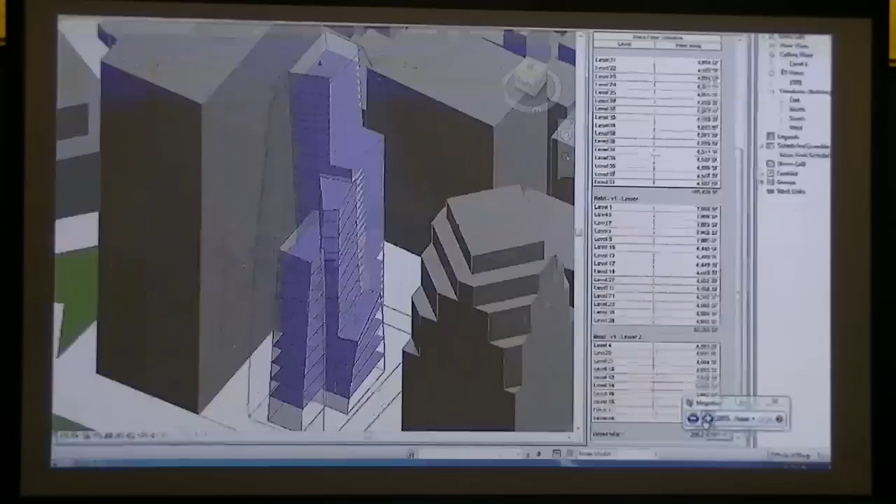Okay, so I'm looking around and I see everyone has some kind of mass, and you have your mass floors. I've also kind of modeled this up real quick, and I'm zooming in on my total area. I've got about 286,000 square feet, and I said, you know, roughly around 287. So you can kind of see that 287,000 square feet could possibly fill up quite a bit of the site, depending on how you organize your floors.

And I've actually got this modeled in 3 different masses with a couple different voids cut, and then I've also used the join command to Boolean union and Boolean difference some of the intersections of the different masses. So I can show you exactly how we can go about doing that. I'm going to hide this site, and I'm actually going to do a permanent hide for now. So I'm going to right click on it, and I'm going to use the pop-up menu here and say hide in view and then element.

Some of you were asking, if you happen to hide something permanently, how do you get it back? You can't use the sunglasses because the sunglasses are only for temporary hides. If you want to get something that you permanently hid, to get that back, there's a little light bulb next to the sunglasses. If you look right there.

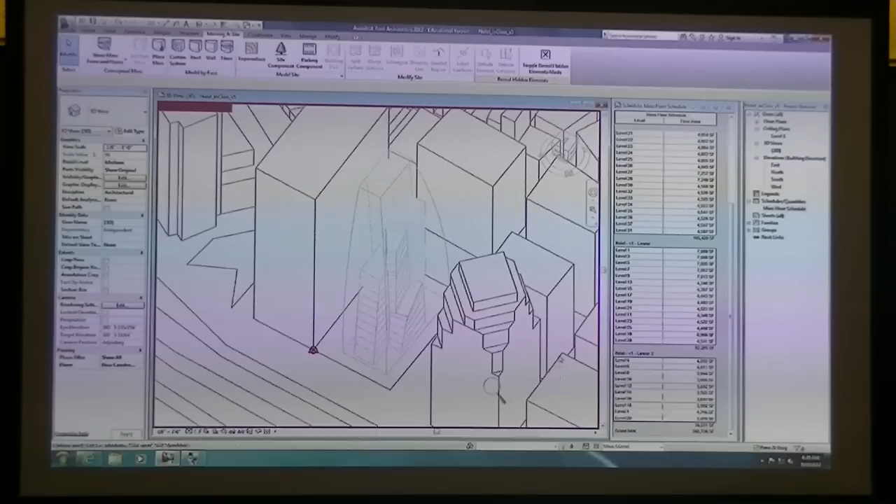And when you click on that, it'll reveal everything that was hidden in red. And so you get this kind of red or pink box that goes around your view. And then everything that was a hidden element is something that you can select, and it's red. And then there's a button up at the very top that allows you to unhide, or you can also right click on it and also choose unhide in view elements. And then once you exit out of that light bulb, you have your element back.

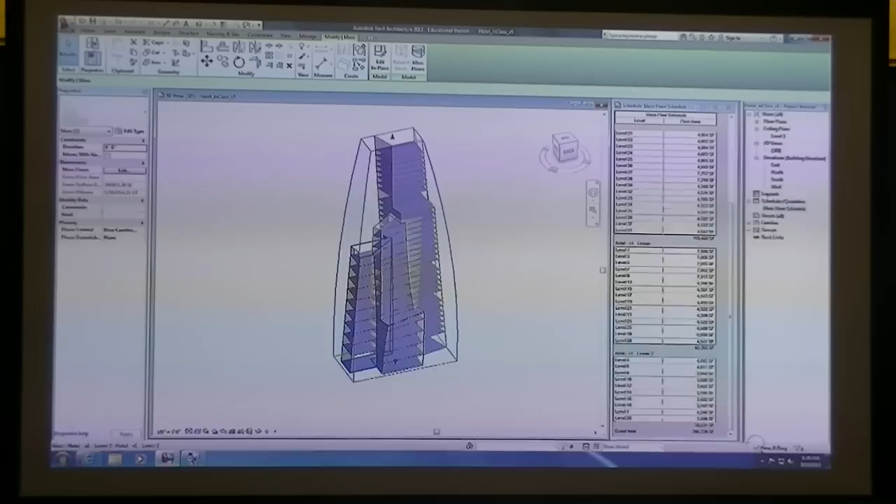So what I've got here, I have my zoning mass. I have this other mass that I built and cut a void out of it so that I could get within my zoning mass. I also created a parametric mass that had to do with making a reference point and then some reference lines that twist around the reference point. And then I just made a quick simple mass that happened to be here.

And each one of these has a different set of which one has what level each floor happens at. So I kind of alternated in some of these cases back and forth. So basically this middle one is every other floor. This one has floors pretty much on every level except for a couple spots. And then this other mass I did kind of the opposite, every other floor. That was part of my twisting box. I'm also going to hide my zoning mass so we can look at this a little bit more as well.

Any questions so far about massing? I know you guys are kind of just first doing it for this first assignment, and the purpose of this assignment was really just to get you familiar with the intuitive massing tools. Anyone having any kind of issues or trying to figure out how to manipulate something, from one floor to the other or one mass to the other? Any major problems right now? Okay.

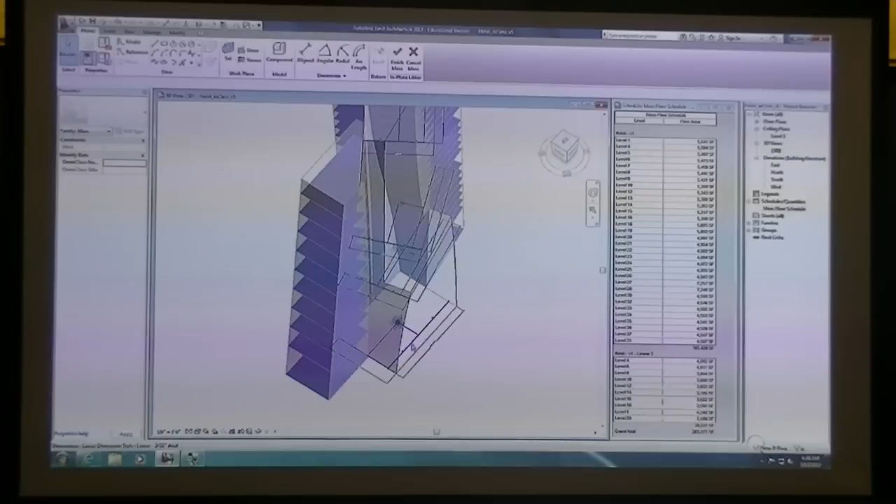So, if you have multiple masses, and in this case I have 1, 2, and 3, this middle one is one I made parametric, and I've got some instance parameters that are off to the left that I set. But if I click on Edit In-Place, I created this mass similar to one of the exercises way back when, and you may not remember, but you can actually create within the in-place masses, when you're in the project environment, you can apply your points just like we were doing with the bridges.

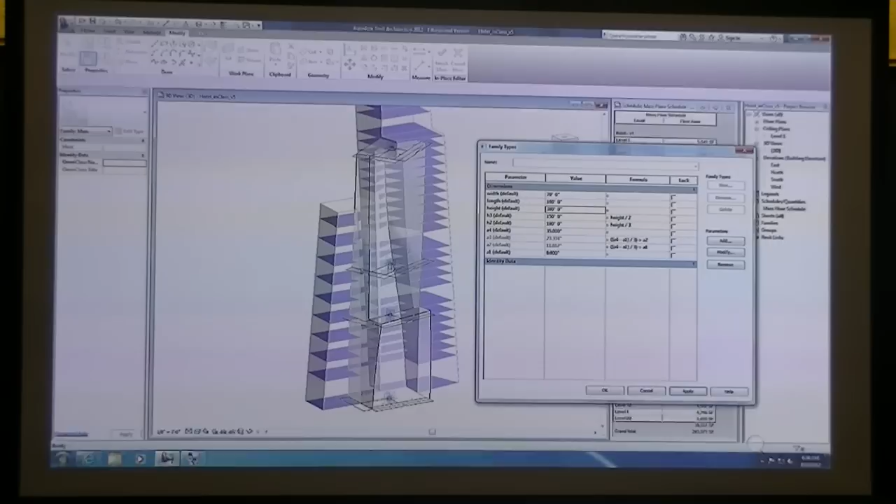So I have a reference point that's in the center of each of these reference rectangles. I set up a bunch of parameters that just have to do with the angle of rotation of that point and also the height of where those points are located. So with this mass, I created a height of 285 feet. If I change this to 300 feet, my mass grows and all of the other points grow with it. I created certain locations of where these other points would always be in relationship to one another. And then same thing with the angle of rotation.

I can actually change the bottom and the top rotation and kind of twist my box a little bit more as we go. And every time you make a change and hit Finish Mass, your floors and everything will update for whatever shape that actually conforms to.

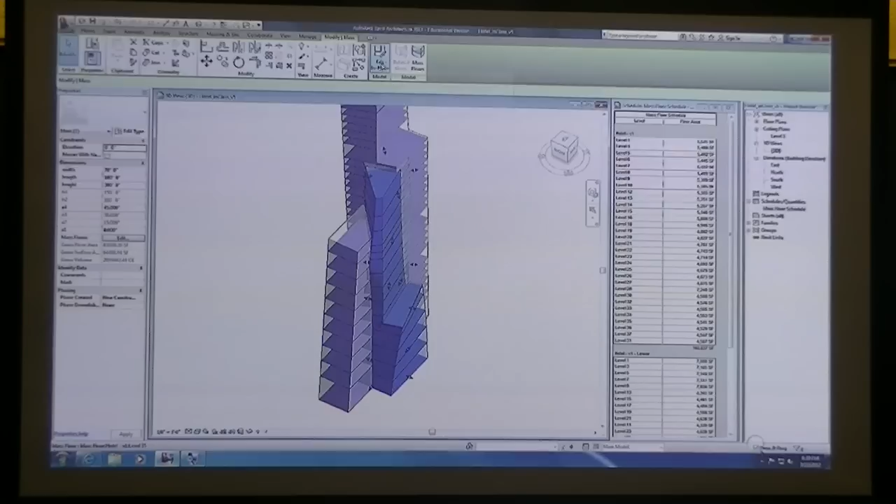The other thing is if you're using voids and if you want to actually go back in and manipulate your void a little bit more, you have to be in the mass in which you created the void. So in this first mass, if I go into Edit In-Place, I can then tab over and you can eventually select the void.

But to further manipulate it, if you turn on the X-ray view, that's when you can start to select either the faces to move, or the points, or however you want to create that void. And then once you left click into space, it kind of goes away again and cuts that void. For the parametric mass, how did you create the planes?

Did you have, like, you place the points and then how? Yeah, so I'm actually going to quickly go over that exercise. Let me show you one more thing, and then let me just show you some of the parametric twisting tower, kind of do a refresh on that exercise. Because I believe I kind of quickly showed it to you in class number 5, and that was quite some time ago.

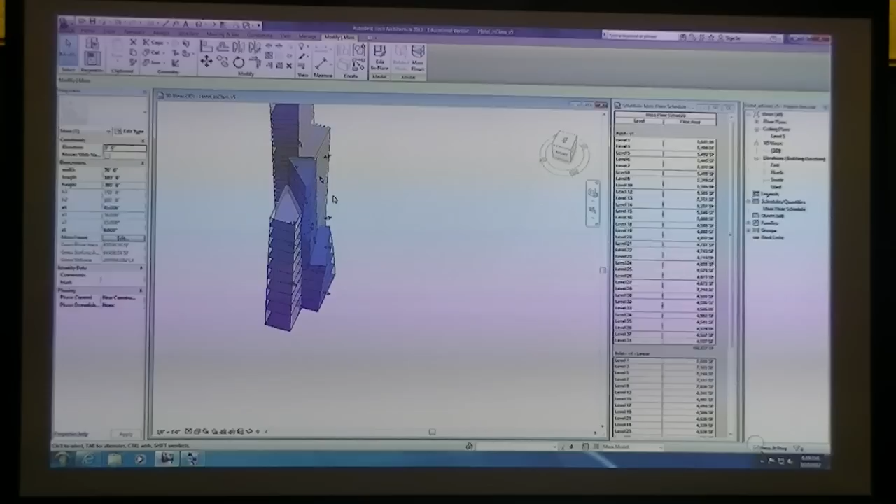One thing is I've got these masses joined together. Right now, my total square footage, of course, I just twisted my tower a little bit, so I'm at a little bit less now, 282,000 square feet. But I originally had also joined my floors. So if you have a couple intersecting masses, if you were to cut a floor at each level, you're actually kind of double counting on some of the floor area, because if I didn't join this mass with the other, here is a floor level, and if you hover over, it tells you what level you're on. So on level 25, that little pop-up window told me it was level 25.

When I look at that kind of pie wedge, it goes and overlaps this other tower. And so really, when I look at my square footage now, all I did was unjoin my towers, and I'm now up to 351,000 square feet. So if you have overlapping masses and then you did your different levels, you could be double counting on some of your area, and maybe making it so that your tower is a lot smaller than it really should be.

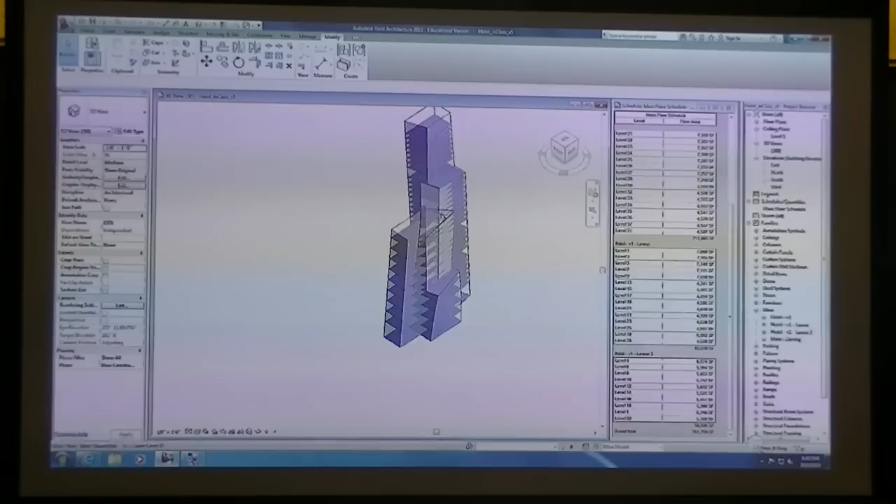So when you have intersecting masses, over here there's the cut tool and also the join tool. I can join these two together by just clicking on join, and the first one that you select is the one that's going to remain, and the one that you select next is the one that's going to have particular intersections cut out of it. So watch what happens, let's see if I can zoom in and look at this intersection area. I'm going to first choose the larger mass and then the second one. You'll see that the larger mass remained and the smaller twisting mass got cut by that operation.

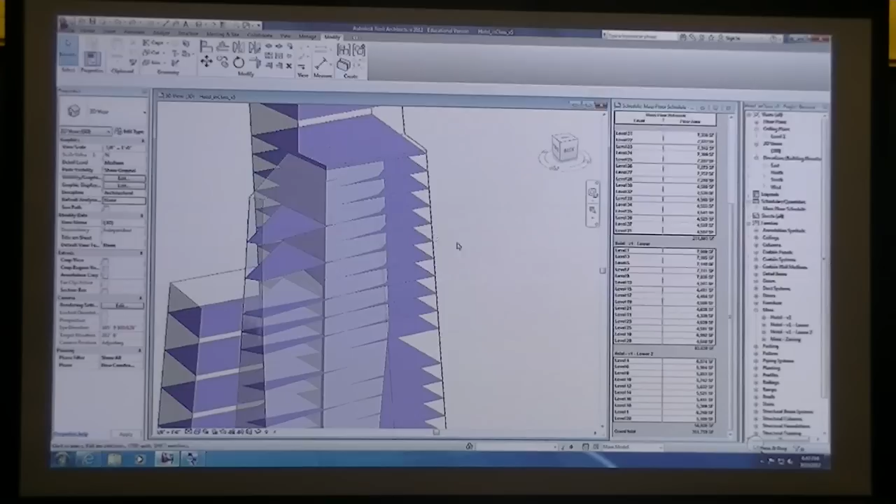And of course, if I reverse it, I did a Control Z. If I join the first one with the second one, you can see now I've got floor wedges that have a void through it, based on where this other mass cut through it. So it's kind of like in Rhino or even AutoCAD, when you model, it's your Boolean unions and Boolean difference. The only thing is, by using the join, none of your pieces disappear.

If I were to do the same operation with a cut, the first one that I pick is the one that's going to remain, and that second one, let's see, I think I did the same thing. So that remained as well. If you delete it, everything goes away. So I guess I'm not sure what the difference between cut and join is. It looks like it does the same thing.

If you join the floors, like let's say you have floors that are close to touching but not, or you have like a mezzanine, is it gonna try to connect those since you're not selecting the actual floors? It's just going to be doing the massing. So if your massing's touching, one's going to cut the other. If they're not touching, nothing's really going to happen. Okay. So the floors are just a result of wherever your levels happen to be, and the resulting geometry of the mass.

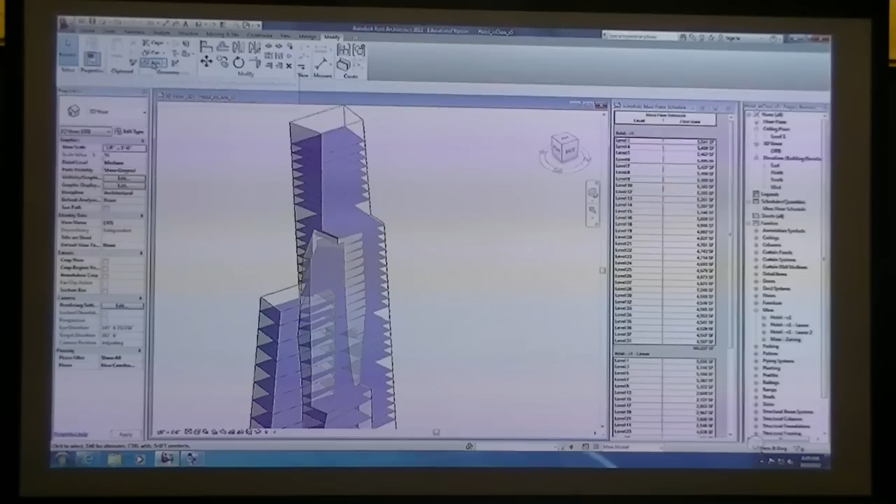So I guess really in this case, using massing, cut and join do about the same thing. I was thinking if you use cut, the second item should go away. But it kind of makes sense, I guess, if I delete one of these, the cut actually goes away as well, because it doesn't have anything to reference.

So you could actually build up a couple different masses together, and then what I did is in my mass floor schedule, if you look to the right, it's actually a little more complex now because I organized it based on hotel volume. And I'm going to show you a couple tricks of how to work with schedules, because once you know this, then you can schedule anything and basically sort and filter and do whatever you want.

With this schedule, and maybe I should zoom in on it a little bit. You can see I've got, doesn't really help. I have hotel version 1. That was the name of my mass that's over here to the right. I have hotel version 1 lower. That's the same thing as this volume to the right. And then the lower number 2 as well.

And each one is totaling up all of its square footage. So I've got a subtotal, and then at the very end I have a grand total to kind of track all of these different volumes. If you have a mass floor schedule, if you open it and you look at your fields, I basically added a new field from the left side, which is your available fields that you have. And it was called mass family.

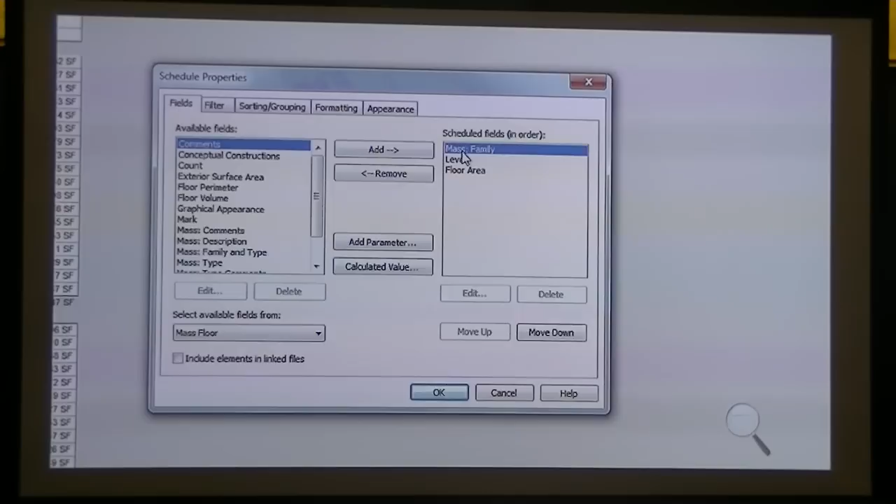Because we created an in-place mass, we're creating a family. And the mass family is the name of whatever you actually named your mass. So that's where I'm getting the hotel version 1, version 2, and lower and all that kind of stuff. Under formatting, this mass family, I made a hidden field. I'm going to unhide that for a minute and look, and you can see that each one of these items now has hotel version 1. It basically has the name of the mass all consecutively in the left-hand column of where that field occurred.

Basically what I was just doing is trying to organize and sort these together. If I go under sorting and I sorted this by mass family, I'm basically organizing all the hotel version 1s to be together, and then the hotel version 1 lowers to be together, and so on and so forth. You're basically grouping anything that has the same name together. So if I actually group this by level, this would change around, and I'd actually have level 1s, level 3, and kind of a mess actually. Go back to...

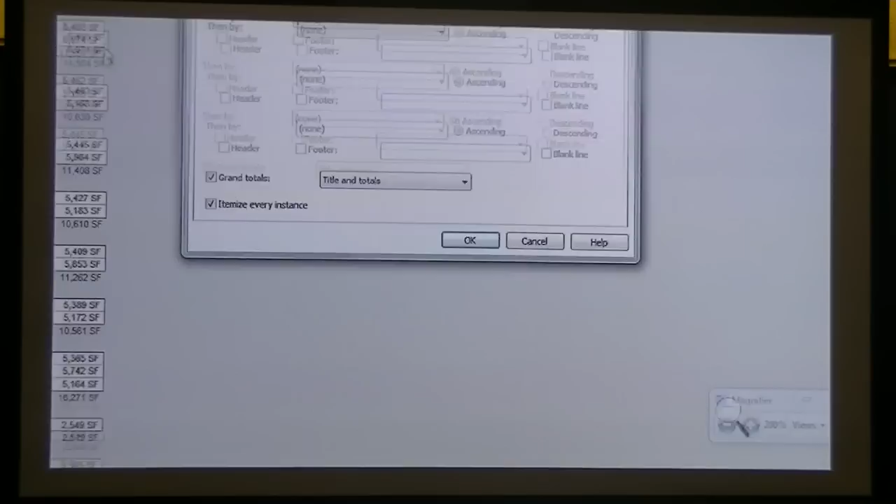And then you have some other options up here in your scheduling so that after you sort something, you can make it a header that basically gives it its name, puts it above the list, and then the footer, and then you have some options for what can be in the footer, and basically it usually has to do with calculations, so totals and counts. So that's how I'm getting the subtotal underneath here. And then at the very end I have itemize every instance, which means show every time I have a mass floor that's in that mass. And then I have a grand total so that I'll get a total at the very end.

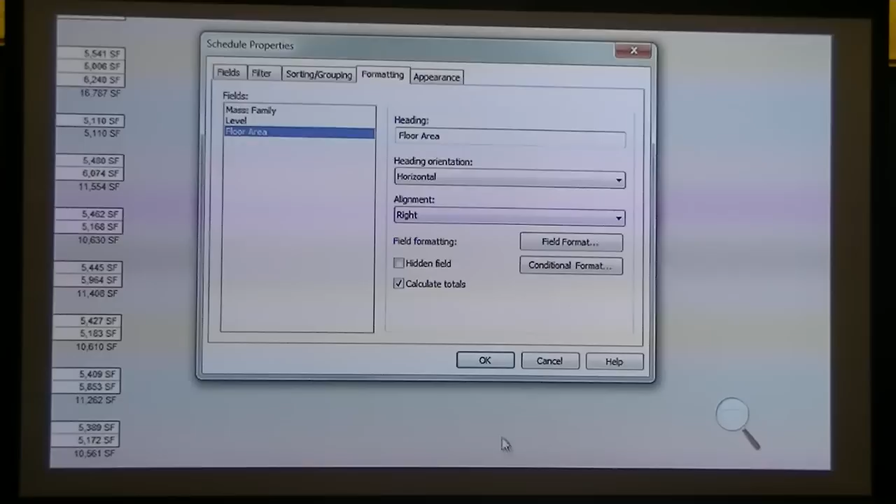The other part to that is if you're totaling items, you have to go to formatting and then click on the field and make sure that you're calculating totals so that it will actually put something in the footer, and then it also has it in the grand total. So I'm going to bring that back.

And so basically by sorting by that mass family, and after going back in and hiding it under formatting, if I hide the mass family, I don't need to see that header basically repeat all the way through my schedule. I just want it as a title for each of these boxes. So that's when you would hide a field, so that you can use it as a header in a sorting mechanism.

You can also filter. So let's say I decide I don't want this particular schedule to schedule anything that has to do with Hotel V1. So I can filter by mass family, and I can say make sure it does not equal, and then it gives me options to pick.

Which item in that field I don't want it to equal. So if I click on that, hit OK, and zoom back out, I no longer see that hotel mass number 1 located, and then of course my grand total is only totaling up these two.

It's not that big a deal maybe when we're just kind of looking at mass areas, but as we get into doing a door schedule, there's a lot of filtering that you need to do and hiding, as well as any kind of other quantities that you want to look at, especially if you're doing like a cost estimate. You might have a couple fields that you want to filter out and just say, I just want this particular schedule to give me the cost of division 9 in the specifications, and then you could have that only show up in there instead of showing all the divisions.

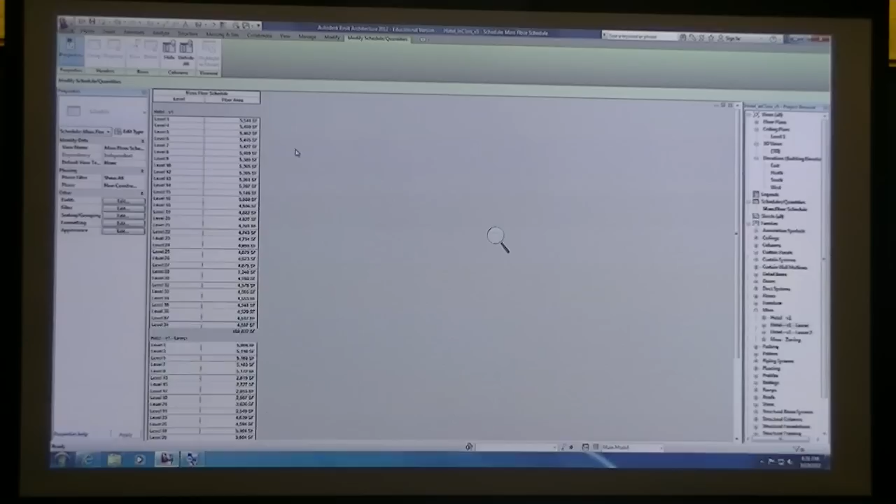So that's kind of a quick lesson in scheduling. So it gives you the ability to give yourself some organizational tips. Exit out of that. And now I'm going to show how to quickly make a twisting tower with some parameters.

Let me get rid of this guy. So I still got my site hidden. I'm not going to worry about where I'm placing all of this. I'm just going to build it off to the right in this white space. But I can create another massing, and I'm going to do an in-place mass, and this time I'll just call it a twisting tower.

And once we do that, we go into a sketch mode where we're actually now in the conceptual design environment. All of our toolbars have changed. And I can place a point. So again, you start to see we get our point element that we're very familiar with now. We get that as an option to come back. And that's always a reference point. And I'm going to place this point, the very first one, on level 1. And I'll just place it off to the side somewhere.

And again, like we always do, we turn on our show always, our reference for that point. And then within this mass, I'm going to create a couple of parameters real quick. I'm just going to call it L for length. And I'll make it an instance. And I can do a W for width and make that an instance.

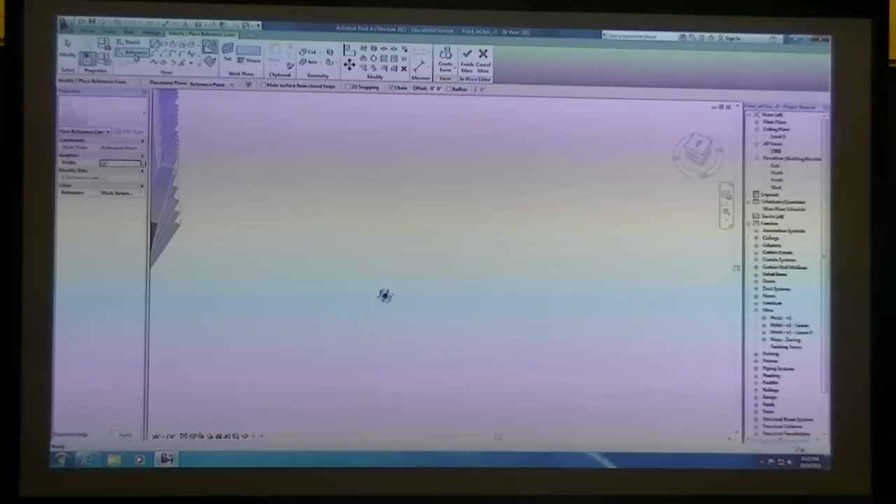And then all I'm going to do is draw a couple reference lines, but what I want to have happen is I want the reference lines to be equal on either side of this plane, so that basically this point is representing the center point of rotation for each of the floor lines, or these profiles. So I'm going to click on line and also make sure I'm drawing a reference. If you accidentally draw a model, remember you can always turn it into a reference.

But when I place this point, I actually want to pick. So, we have a lot more levels now to scroll through, so you might have to scroll down to the bottom and choose the point. And then we want to pick the horizontal plane of that point, because I basically want to make another profile on this plane, and it's going to rotate as this point rotates.

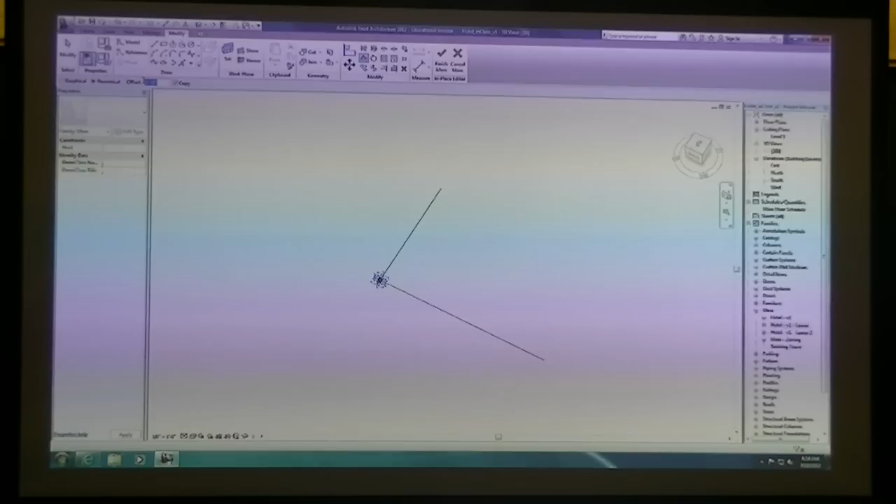Next thing I'm going to do is draw that line again, and I've picked where I'm drawing on that plane. I'm just going to draw one at the center line in each direction. I'm going to make sure that I'm snapping to 90 degrees. And I'm going to offset, and for now I'm just going to do like, let's say 20 feet as an offset. And I'll offset this line on either side.

And then you can use the trim and extend the corners to make a box. And then when you're done, you can just delete those reference lines that were part of the middle, because we don't need those anymore. The next thing I'm going to do is draw an aligned dimension. So it's already up here in my measurement tool palette up above, or you can go into Home and you can also find aligned dimensions.

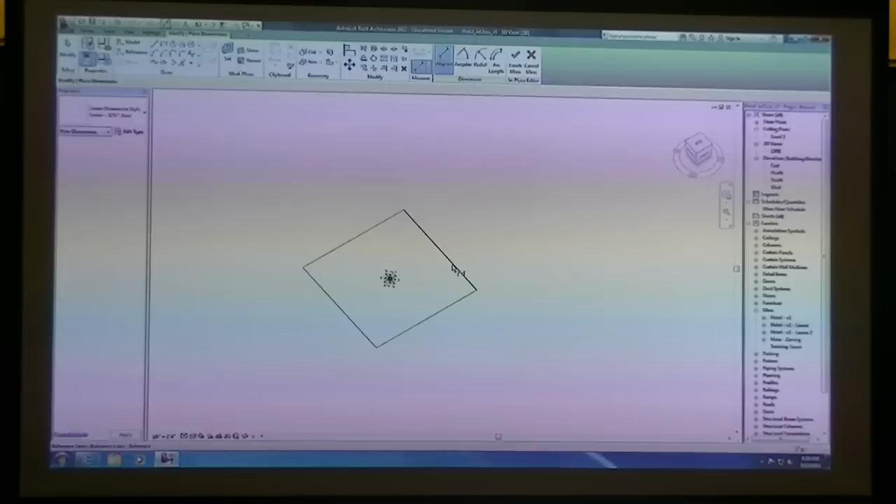And I'm going to first do a dimension that goes to the center plane, not the point, the plane, the vertical plane of each of these, and I'm going to choose equal, equal. I'm going to do the same thing going in the other direction and choose equal, equal. And then I'm just going to do an overall dimension on each side as well. I'll pause for a minute, but I'm going to apply one of these to be the length, another one to be the width.

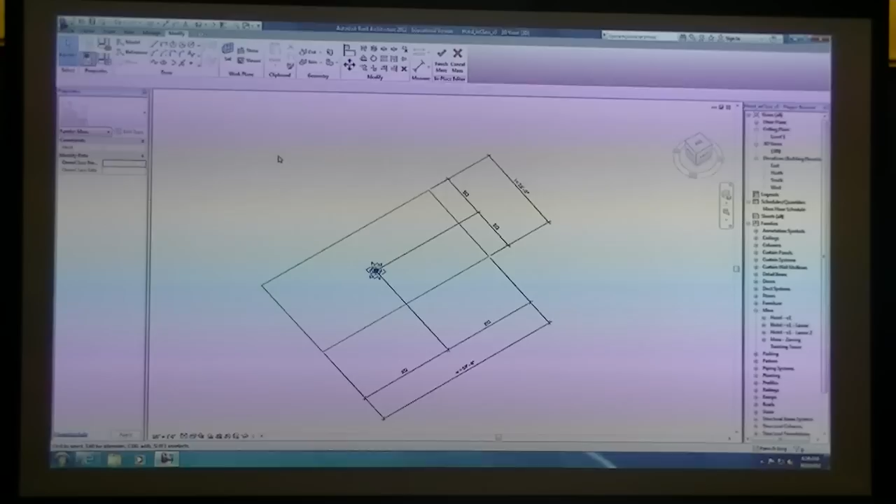And I better test it out to make sure it works. So I'm going to change this to 50. Change this other one to 25. So after you're done and you've set your equal, equal, your equality constraints, and then your overall dimensions, and you set those to either length and width, you want to go back into your parameters and change the values and test it to make sure that it's operating correctly.

Everyone got that? Still working on it? I'll give you a minute.

When you draw a dimension string, I'm going from one line, snapping to the vertical plane of the point, and going to the next one. When you drag it off to the side, you'll have an EQ with a slash through it. Or if you already deselected, you can select that dimension string again and that EQ will come back. And then you can place the EQ.

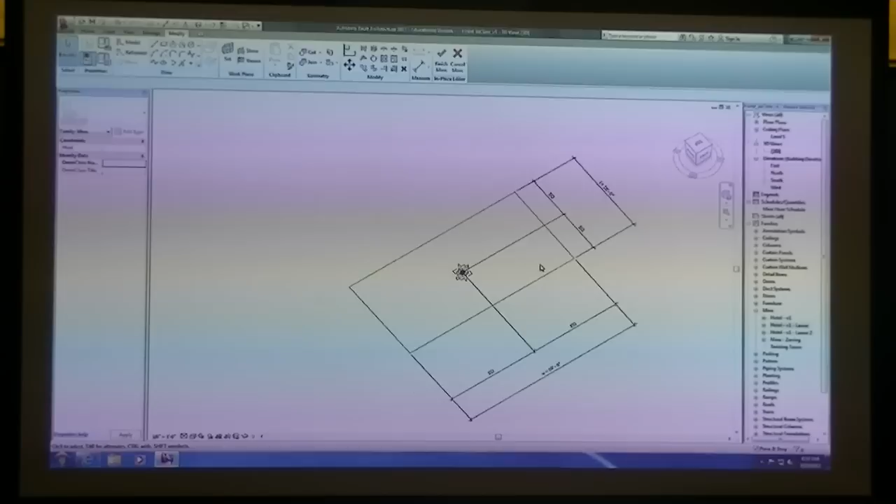And I have an error message that just popped up because I already have an equality setting set, and it's yelling at me saying I'm over constraining. I can't select my parameter because it says line is too short. Line is too short. Yeah. Are your parameters set to 0 before you apply them? Yeah.

Okay, everyone get your equal, equal. When you have your equal, equal, that has to be a continuous string. And when you apply your overall dimensions, those can only be one string at a time when you're applying them as parameters. And you don't have to lock anything. The equal, equal creates a lock for you. Test out your parameters to make sure that they're moving about the center. So I'm going to type in some different dimensions and make sure that everything grows about the center.

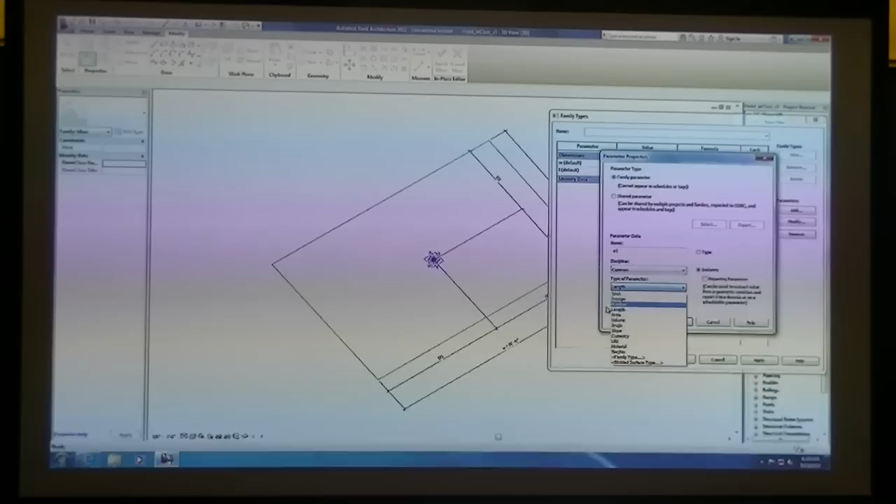I'm going to create another parameter, and I'll call this A1 for angle 1. And I'll also make this an instance, but we want to make sure that type parameter is set to angle. And we can hit OK.

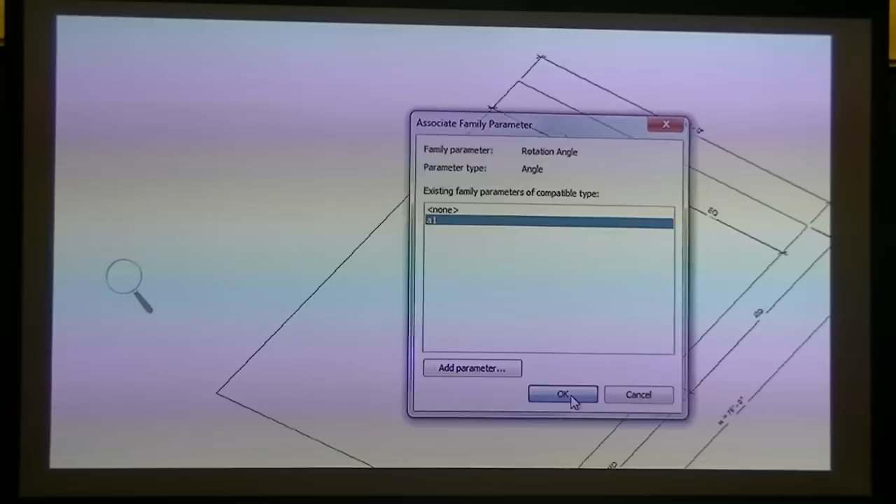So what we can do now is take this point, and because this is a reference point, off to the left you have additional parameters that you can choose. And so we can take this rotation angle and set it to equal A1. Then, before we continue, you want to test that when you change this angle in your parameters, so if I change this to 25, everything should rotate.

Basically, what we just did is very similar to when we did the cross-section of the bridge. Before you did your sweep, we made the width change, and then it changed by the center point. It's basically the same concept, but we're now doing it in a horizontal way. So again, test your angle. It should rotate around, and so should all of your dimensions and everything around it.

Okay, so the next thing I'm going to do is select all of this. And I'm going to copy it to the clipboard. And then when I paste it, choose aligned to selected levels. And then just for now, I'm going to pick level 3, level 5, and level 7. And click OK. I'll Control Z that and do that again.

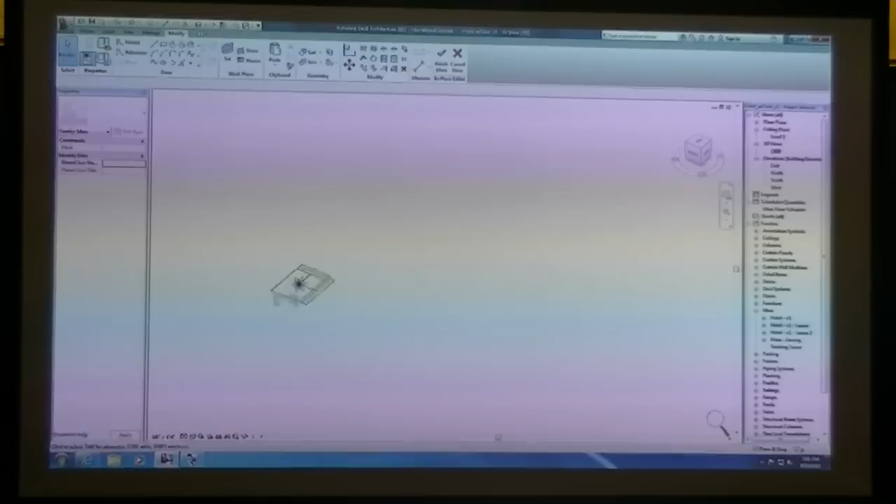Does everyone have this part worked out, the base? So select the whole thing. I windowed around it. I copied it to the clipboard. You can either click on this icon up here, copy to clipboard, or do Control C on your keyboard. And then when you paste, click on the down arrow under paste and select align to selected levels. It'll bring up this dialog box asking which level you would like it to align to. And then I picked level 3, holding Control, level 5, and level 7, and then I hit OK.

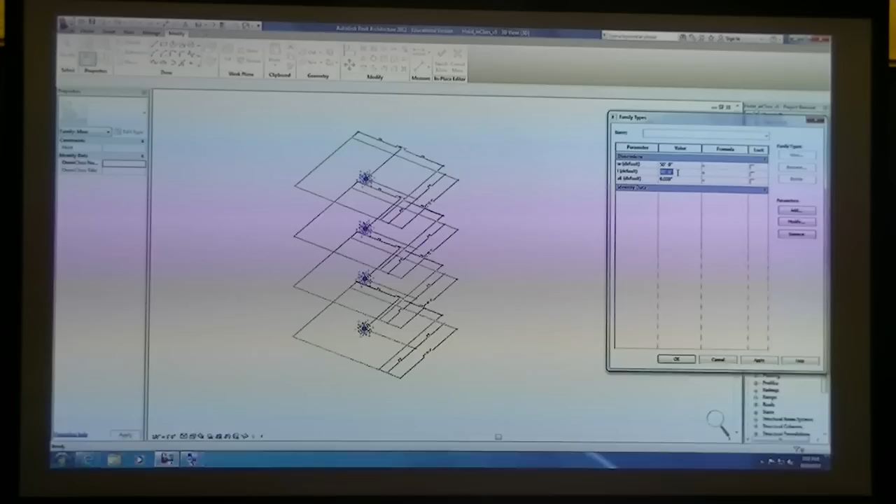This way you don't have to set up all those parameters again. You're basically just copying it up. And if you change your length and width, if I go back and test things out again, all 4 of them now manipulate and change as well.

Now, you're probably wondering why I didn't just do every single floor level. You could go into that complexity, but even though we're aligning these particular floor levels, what I'm doing is establishing a height constraint, an overall height, and then making my other points in between evenly dispersed, from the start point to the top. I'm going to also do the same thing with the angles.

So I actually need to create 3 more angles. I need an A1 through 4. So I'm going to do an A2. I'll make that an angle in an instance. I'm going to do an A3. That's an angle in an instance. And then also an A4. Angle instance.

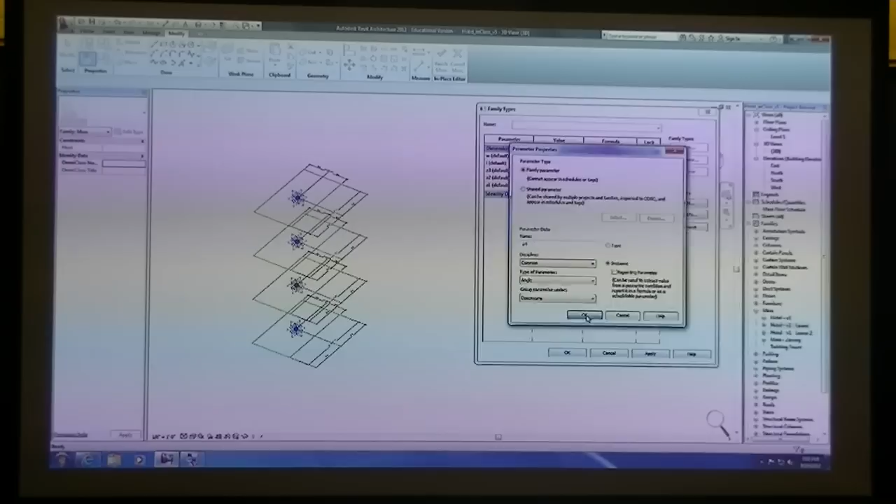I'll also make an overall height, so I'll just call it height. Or I could just call it H, since we're trying to be short. Is that an instance also? Yeah, I'm making everything an instance. And I might make the H a value of like 150 feet, just as a default for right now.

Then I also need basically, H is going to be the top point, and we need also a height for these other 2. So I guess it really doesn't matter what we call them, but maybe call it IH1 for intermediate height. And I'll do IH2.

Now basically what I want to have happen with the angles is I want to be able to control the bottom angle and the top angle, and then these other two angles can just rotate and try to morph in between so that I get a smooth twist. So angle 1 is going to be 0, angle 4, right now I'll set that maybe to 100 just so I have an easy number to work with.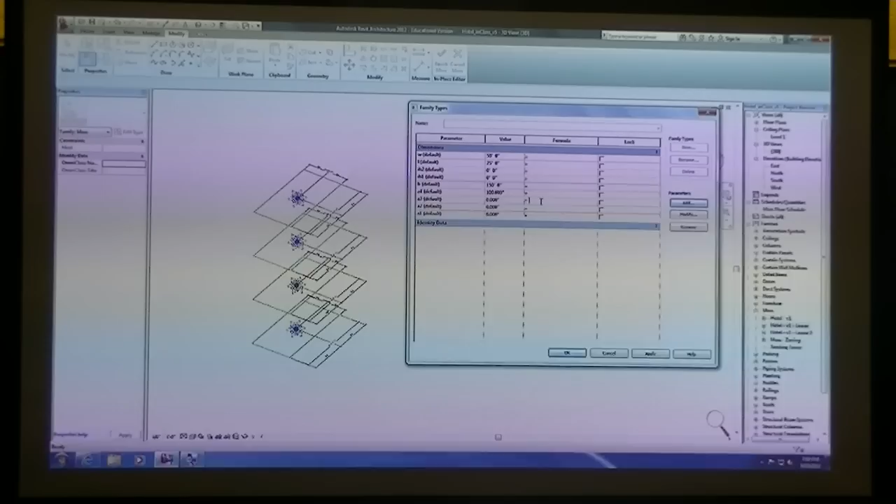And basically my A2 and A3 need to be a formula. This formula would just be in parentheses. I'm doing this on A3 right now. I guess I need to zoom in here. I'm going to do the top, so A4 minus A1. That will give me whatever the overall angle shift is, because I could have a 10-degree angle on angle 1, and then I'd be getting the difference of 90.

Then I want that to be divided by 3, because I'm going to have 1, 2, 3 spaces in between. If I put parentheses all around that formula, this will be added to A2. I can Control C and copy that formula down to the A2, and this time instead of plus A2 it'll be plus A1. And so what you can see is that formula makes A2 at 33.3 degrees, A3 at 66.6 degrees, and then 100.

If I were to change the A1 to something else like 25, you should see everything else 25, 50, 75, 100. So it seems like it's working out to be an even distribution. The next part, I want my intermediate heights to react in a similar way. So what we can do, and we don't really have a beginning height because that bottom of the tower is going to be at 0. So we don't have to really do an A4 minus A1 type of thing.

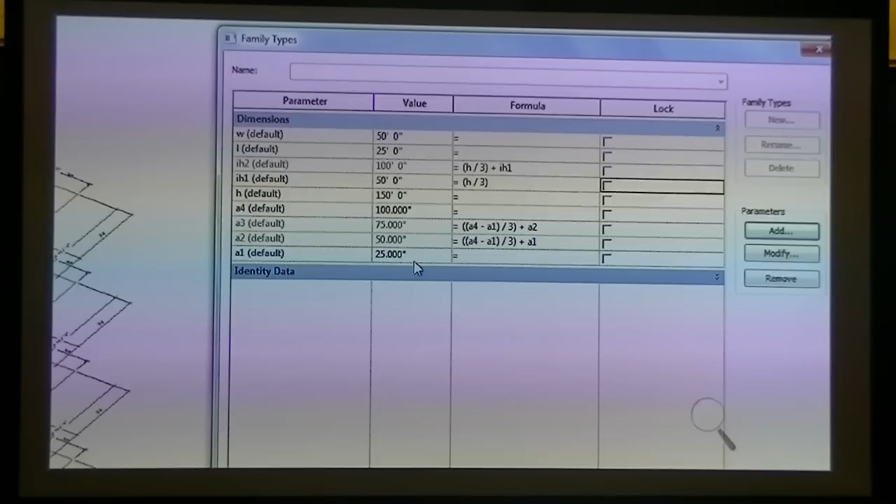I'll leave that up for a minute. Does that all make sense? I'm basically just trying to make an even distribution of where those profiles occur. And I'm just doing this as a preference. Obviously, you might decide that you don't want it to be all equal all the way up, depending on how your parameters change. This makes for a smooth twisting form. Can I zoom out? Or are people still typing?

Okay, so now I'm going to hit OK, and your items might react a little bit depending on what you were playing around with as your values. But now I have to set all of these correctly. Since we did a copy paste and we copied them all up to all the aligned levels, each one of these are actually equal. If we look at our rotation angle, they all have the same rotation angle. It's because we had them all originally equal to A1, and then we copied them up.

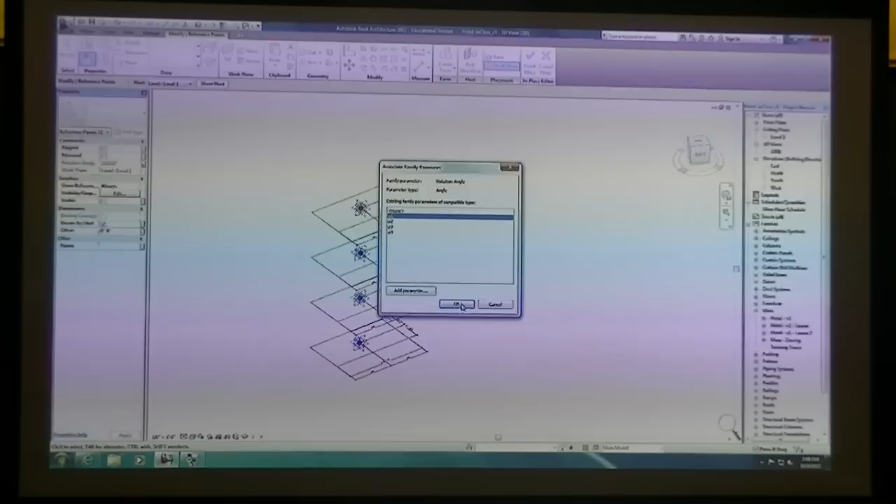So then what we need to do is go to the second one up, make that equal to A2. The next one up, make that equal to A3. And the very top one is equal to A4.

And then each one of these, we can set the offset. So I'm going to start at the top this time, and over to the left under properties, if I select the point, there's an offset, and I'm going to choose that button. And the first one will be H. It's going to go up pretty high. The next one down, we'll make that IH2. And the next one down, IH1.

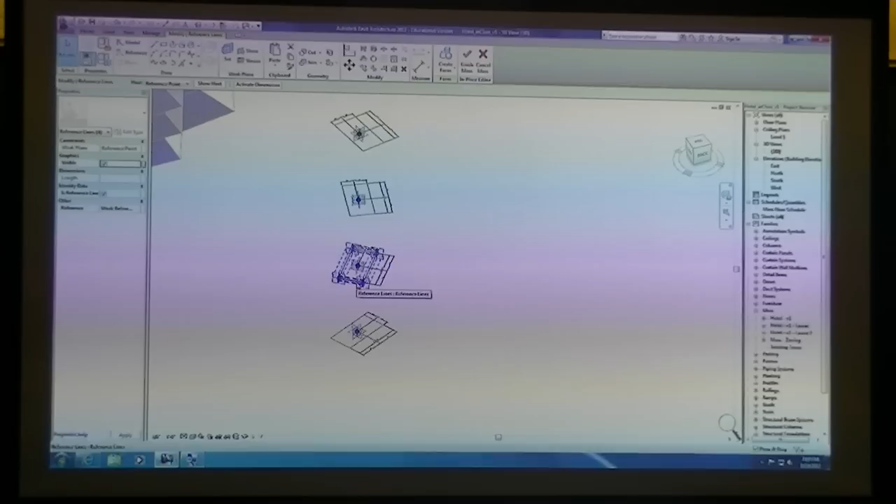And for now, I might go back into my parameters and change all my angles back to 0, just so I get an easy loft here at the very beginning, so that I know it at least works at the start. And then all I'm doing is I'm selecting each one of these reference planes and choosing create form in a solid form. Once you do that, you can test length and width. Make sure everything grows how it should.

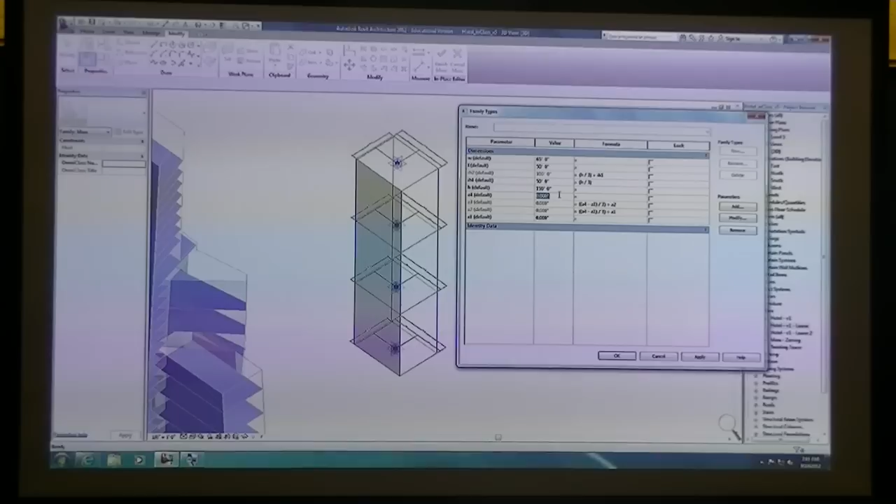And then I can start playing with the angles. Maybe start at 30 at the top. Maybe the bottom rotates 10. Maybe the top is even more drastic, and go to 75. So basically, oh, now I also didn't test the height. And then you can test the height. So I had it originally at 150. You could change it to 200 feet. And so you can see how your twisty tower quickly can be adjusted on the fly.

And this actually did come in handy when I was modeling my form in the middle, because when I twisted my tower, it poked out of the zoning mass. And so then I kept playing with the parameters until I got it to where the corner wasn't poking out, or I changed the width or the length. So that would be one good reason to make a parameter.

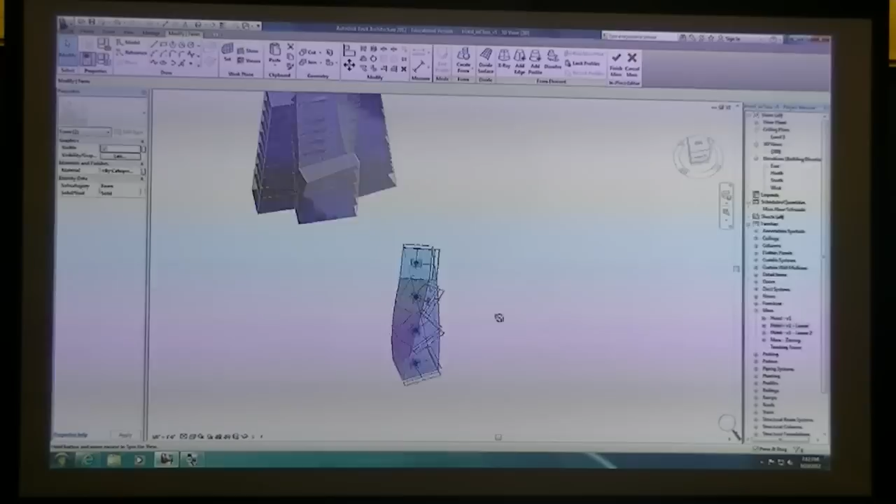And then earlier there was a question about, well, what if you had a void and you wanted this to have a void that twists with the form? You would do the same thing, but you could set up a set of reference lines or reference points that are associated again with this center point. And if you drew another profile, I could make a little cut right here on each plane and then make that a lofted void. And if you have it set to similar parameters, or referenced to this horizontal reference plane, no matter how that point twists and turns, your void should also follow the shape of the solid.

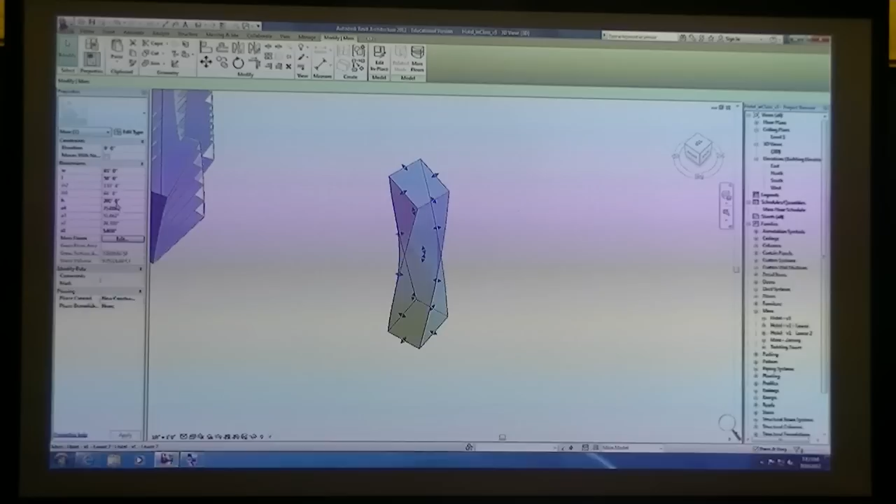Whenever I'm done, I can hit finish mass. But because I made those an instance parameter, once I finish the mass and I select it, you can see off to the left I have a bunch of properties that I could still manipulate. So instead of having to go back into edit and change all the properties again, I could just come in here, because they're all instances, and change some of my angles and or height without having to keep going back into the massing mode. So anyway, those are a couple different massing techniques.

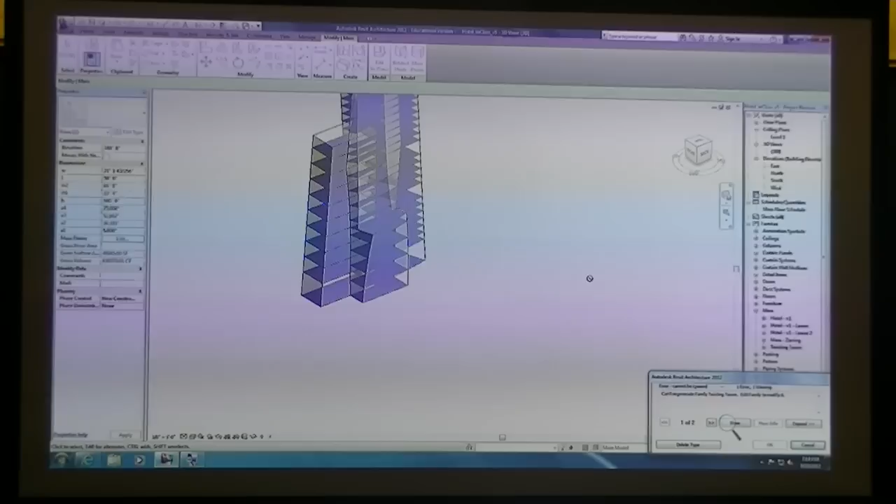Next thing I want to do is get into, once we have our floor masses, what we can do with them. Essentially these masses, again, everything that's a mass in your model is always considered, and right now, before I continue, I'm going to take this mass that we just made and I'm going to delete it. It does go away. Never mind, I thought it would stay in the family environment. So I guess that's one of the downfalls of massing in place in your project environment: if you did all that work but you don't want this tower and you hit delete, it actually goes away.

So again, you could also model all this stuff in the conceptual design environment as its own family, and then do a save as and actually bring it into the project environment and place it as well. But anyway, all of the massing elements, anything that you do with massing tools, are typically in Revit supposed to be kind of an underlay, and they're used as a way to generate form and apply real Revit components to it.

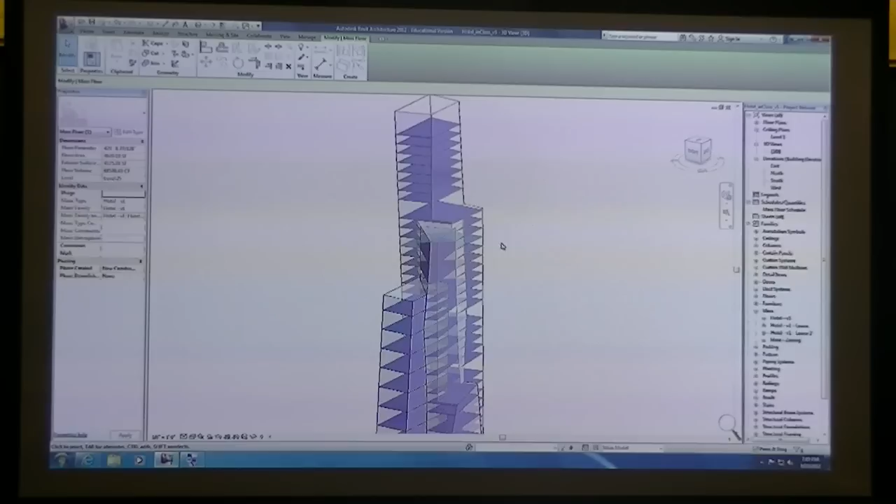So since we have all of our floor plates, let's see, so we have all of our mass floors, and what we want to do is actually apply a real floor element that Revit recognizes as a component in the project environment, and not just a conceptual design tool. Because remember, if I hit VG and turn off the mass, everything goes away. So it's not really a real element that Revit recognizes as something that we can later model to.

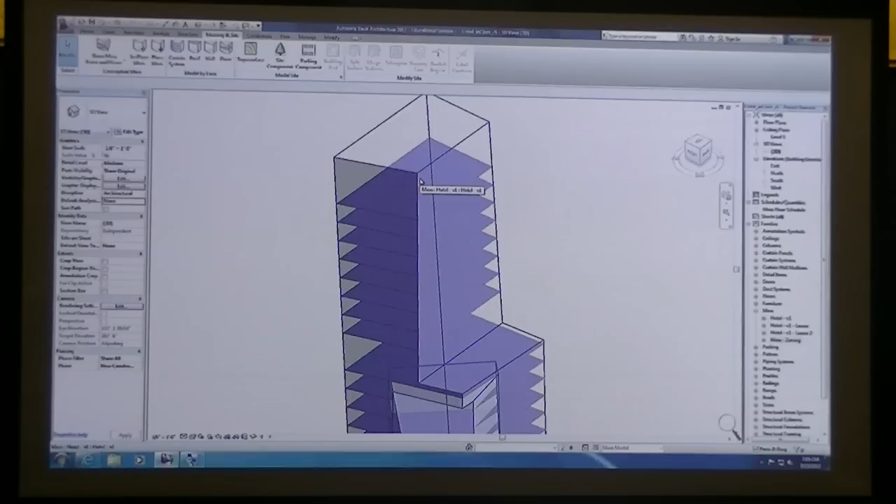So we're going to start going into sketch-based tools that have to do with floors. And if we click on Home, these are your main modeling tools in Revit when you're in the project environment that have to do with building components. You have walls, doors, windows. Components are just additional families that you can bring in. And of course, everything in Revit, there's always kind of a starting point. So whenever you click on a wall and click on the property drop-down options, there's already a set of walls that are already part of Revit. Same thing when you go into a door family, they have like one door loaded.

There's all these kind of items that are already preset into Revit, but the way that Revit works is there always has to be one thing to start from. So there always has to be a door, or a window, or at least one floor assembly or something. And the way Revit works is you select that item, you duplicate it, and then we manipulate it to conform to what we want it to be.

So under Home, our sketch-based tools are anything that's a horizontal plane. So we have roofs, ceilings, floors, and anytime we know that we're using a sketch-based tool is if you click on, and I'm going to go into a floor plan. So let's look at level 1 for a moment. I'm going to hide our site. ZF to zoom in. And when I click on floor, you'll notice that everything kind of grays out.

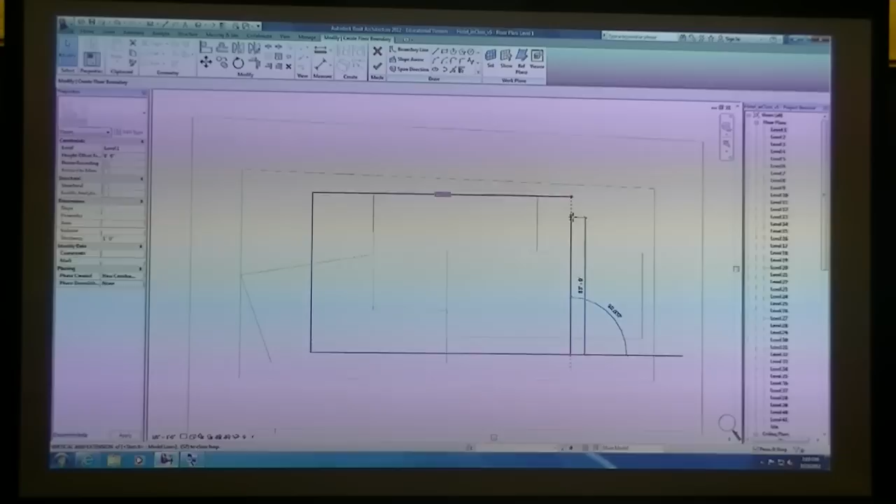Anytime you're in a sketch mode, you have basically purple lines, this magenta line. That is what you're sketching. That is your sketch element. And when you're in sketch mode, you have to make sure that you're making a closed shape. So for instance, if I happen to sketch and I don't have these items closing over here at the end, and I try to exit by clicking on this checkbox, Revit will yell at me, give me a couple orange dots, and it'll say that lines must be in a closed loop. Do you want to quit sketching, which will basically exit out of this sketch, or do you want to continue?

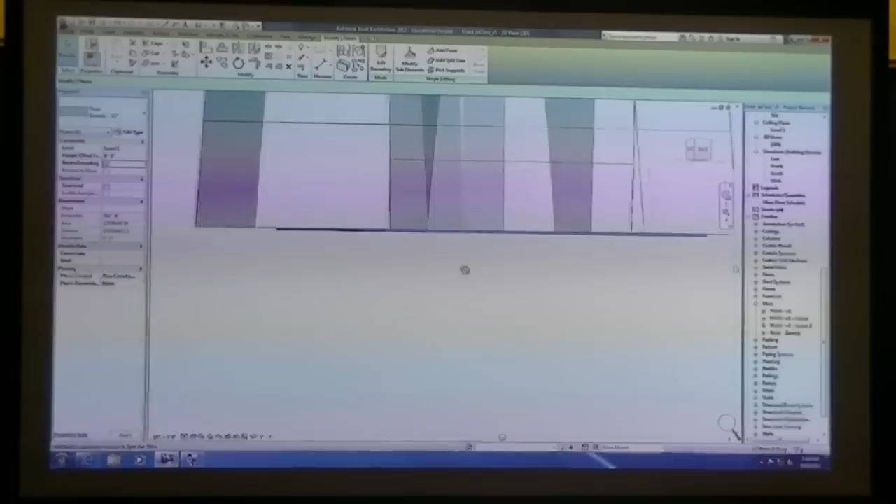So I'm going to hit continue, and this works in the opposite way, so I can also drag. If I happen to have overlapping lines, I'll get the same error message. So you want to make sure that you're making a closed shape, and then when you hit the exit button, you will exit out, and we can go back to our 3D mode. And I'm down at the first floor, and you can see that we created basically a rectangular floor. Now when we click under massing and this button up here to the top left that says show mass, everything goes away except for that floor element, because that's an actual real project environment element that Revit recognizes as a floor.

Now a couple things, let's just copy this floor up a little bit because I want to cut a section through it. Not worrying about the mass at the moment. I'm just going to select this floor. I'm going to hit Control C. Then I'm going to paste. I'm going to have to probably click around until I hit Modify again. Oops.

And then under Paste, I'm going to do Align to Selected Views. And I'm just going to pick 2, 3, 4, 5, and 6 for now. Where's the copy on it? Control C. Control C, or under Modify on your tool palette, next to where it says Paste, you'll have a Copy to Clipboard, a Cut to Clipboard, and then also a Paste option.

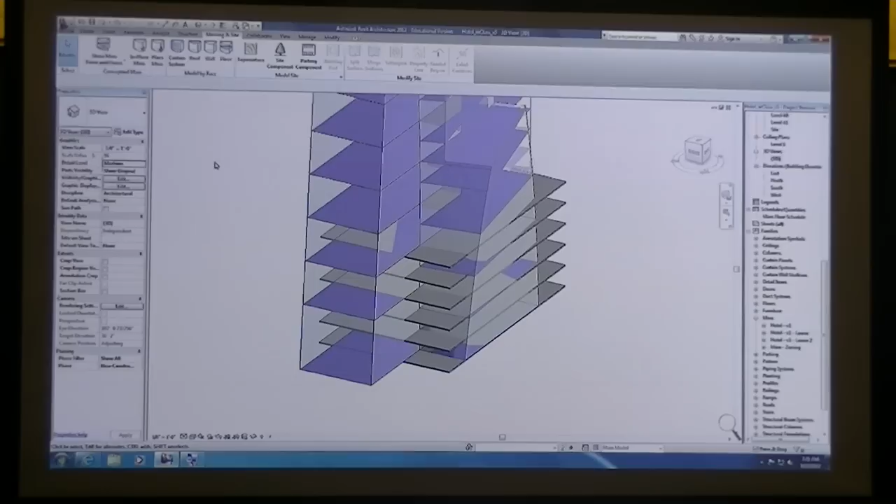Can you start back at making your mass go away? Under Massing and Site, just press this button, this little pie wedge at the top left. If nothing happens, just delete your mass? No, you never delete. Oh. Then you're going to get rid of it. So hit VG and make sure that your mass is turned off. And then basically what that does, if your mass is turned off in the visibility graphics, this toggle button works then to toggle your mass on and off. If it's not going off, you probably had the mass checked also in the visibility graphics.

Jeremy, it doesn't let me select Align to Selected Views, but I copied too. It says Align to Selected Views. It's right, it's grayed out. It's the second one. Oh, Align to Selected Level. Selected Levels, sorry. Sorry, I keep saying Align to Selected Views. It's Align to Selected Levels. Align to Selected Views is normally grayed out. Thanks.

Okay, so let's just go back into level 1, and I'm going to cut a section through this floor because I want to show you some of the tools with the floor. You're still in sketch mode. You need to exit out. So hit cancel and start over. So actually, you have your floor right there. Go ahead and left click on that. Control C, and then up to the top left there where it says Paste. Click on the down arrow under Paste, and then Align to Selected Levels. And then I chose like 2 through 5 or 2 through 6.

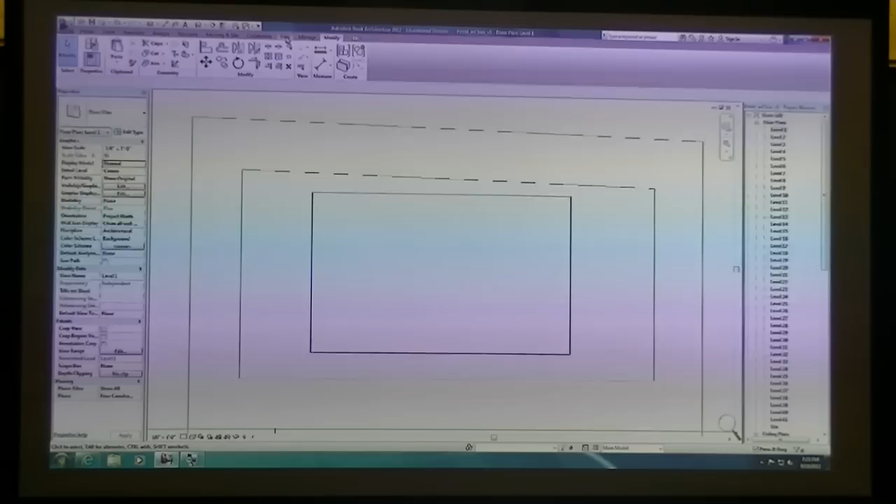So if I go back into level 1, I'm looking at all this in plan. Under View, I want to cut a section and look at what this floor is looking like. So I can click under View and then Section. It's yelling at me to save my project, so I'm going to save it. And basically cutting a section, we've done this before, but you're basically just drawing a line through where you would like your section to occur. And as you do that, in your project browser it'll now say Sections, and you have a Section 1 that shows up.

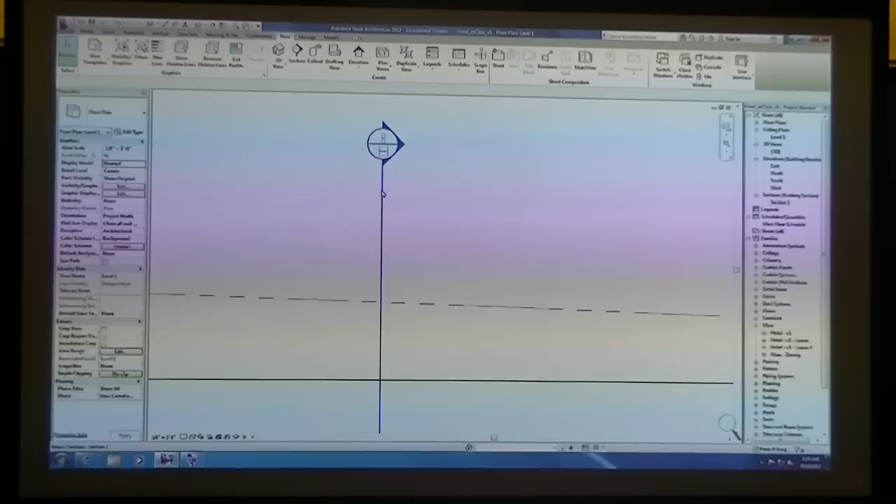You can get to that section in a number of different ways. We could just double click on the arrow of the section marker. And again, with this section marker I can drag this wherever I want. I can click this rotate button. It looks like a rotate button, but it's actually a cycle button. It cycles through an arrow or a tail or none at all. And then I can also use my flip arrows and flip my section. I can double left click on that and it'll take me into my view here, and I've got my...

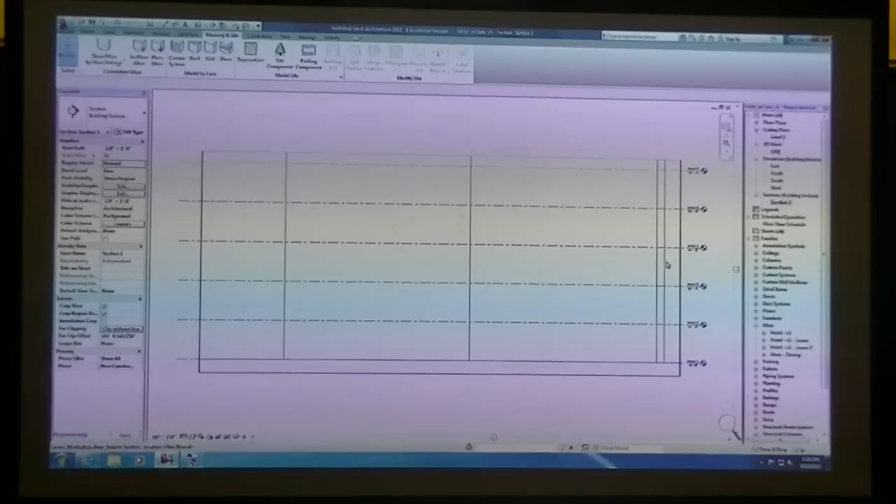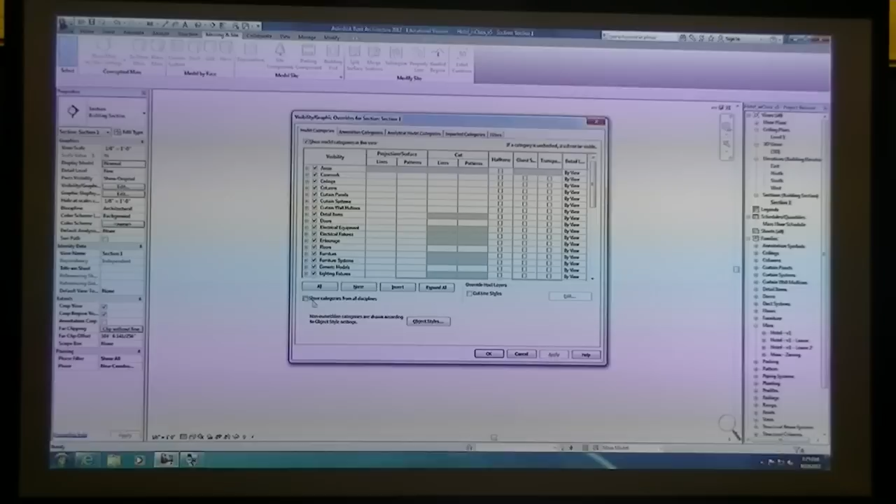What happened here is when I flipped into this view, every time we flip into a view right now, we're going to see our imported site model. Remember the SketchUp model, and we're going to always have to turn it off. One thing that we might do later on is have your site model as a separate Revit model, and then do all of your massing and everything just as you are. You can basically do a save as of this file, and we can link in the site model so that later on we can turn it on. Otherwise, every time we make a view, we're going to have to go through these steps. But the easiest way to turn it off is go into VG, and under imported categories is your Lower Manhattan DWG.

You can just uncheck that, or you could also uncheck Show Imported Categories in this view and hit OK, and that will get rid of that site model. Because it's a model from DWG or a model from SketchUp, Revit does not recognize it as an object, and so it can't cut a section through it. So basically every time you cut a section, it's kind of showing you an overall elevation of it again. And so it's always going to hide whatever you're looking at.

Same thing with mass elements. If you were to cut a section through a mass, like your towers, again, it would not really recognize it as a true element and not cut a section. So you can look at your floor and you can see you have these sections. And I could turn on my fine view. There's really nothing showing up in this floor.

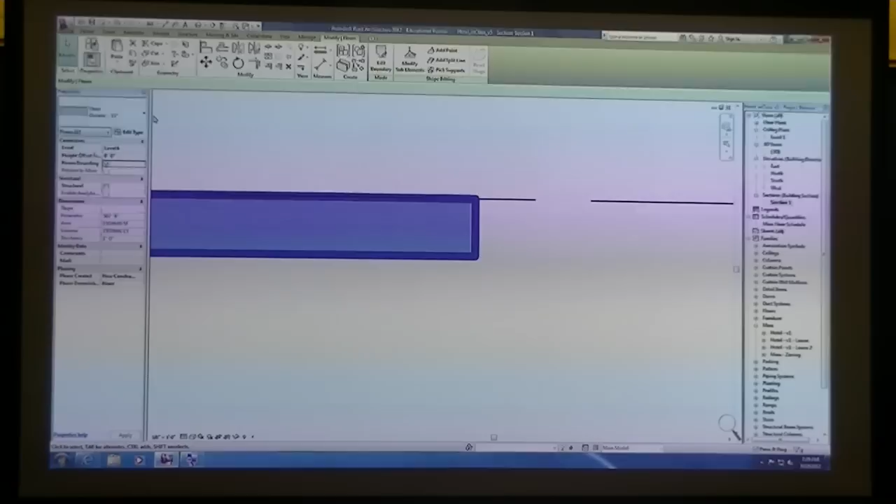Let's zoom in on one of them and change our floor type to something that would normally be in a skyscraper or any kind of building, even like this one that we're in right now. You select the floor, and under properties, there's one here called 3-inch lightweight concrete on 2-inch metal deck. Go ahead and just click on that. And I'm going to turn off the line weights up at the top here. And you can zoom in, and you can see that you have a corrugated metal, a metal deck.

If you don't see this corrugated metal deck, I'm going to show you why. So if you don't see your deck, guys, listen up. If you don't see your deck, cut a section looking the other way, because Revit assumes a certain direction of where this deck is going. And again, VG, imported categories, and turn that Lower Manhattan off. So if your 3-inch on 2-inch metal deck looks like this, just flip views.

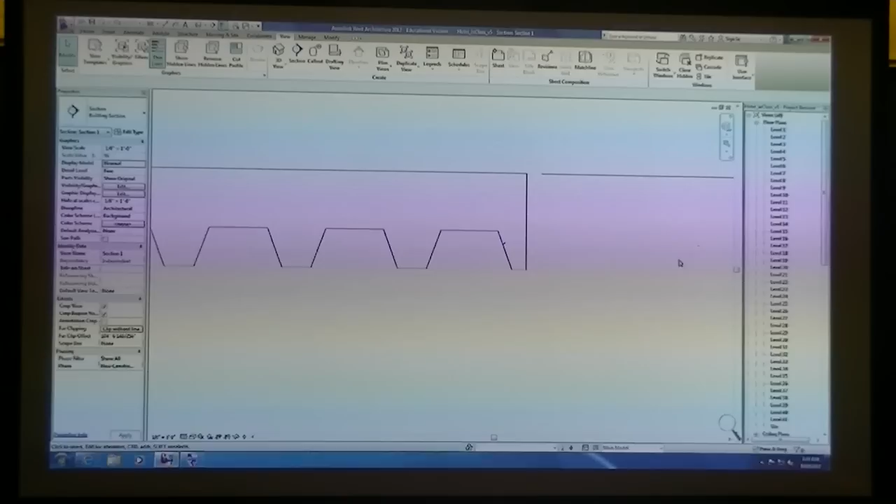Turn on your fine view. All structural elements have to be seen under a fine view. So right now you might be in a coarse view, and in your coarse view, you're not going to see a certain level of detail. Down at the bottom, you've got coarse view, medium view, and fine view.

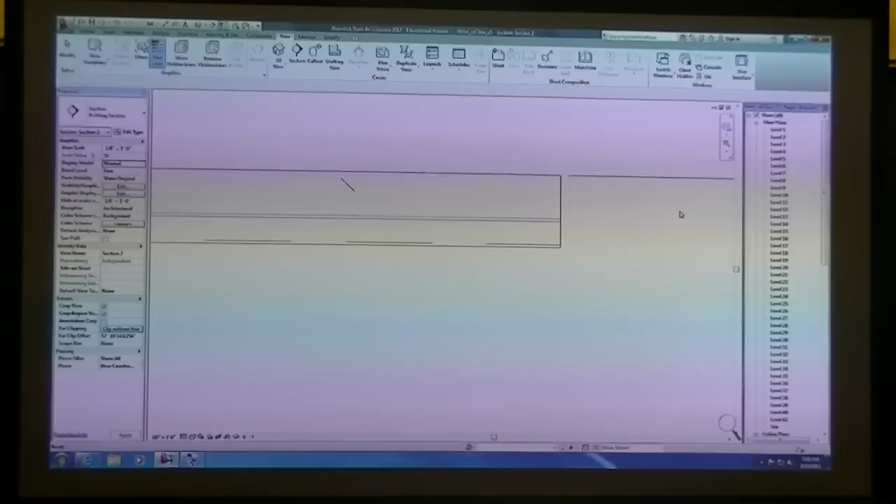Okay, everyone got that? But you might decide, for instance, that Revit assumed that your deck was running a different way than you thought it would. We all know that our structural deck is going to run perpendicular to however our structure is running underneath. Of course, we don't know what our structure is right now, but what I want to point out to you is, if I go back to this sketch, I'm on level 6, so I'm going to go into my level 6 floor plan.

And if I select that floor, I can edit the boundary. Remember we made it as a sketch element. I can click under Edit Boundary. It'll take me back into sketch mode. Notice that on one of these edges, there's this extra set of lines that are, in my case, going horizontal. That's indicating the span direction of your floor.

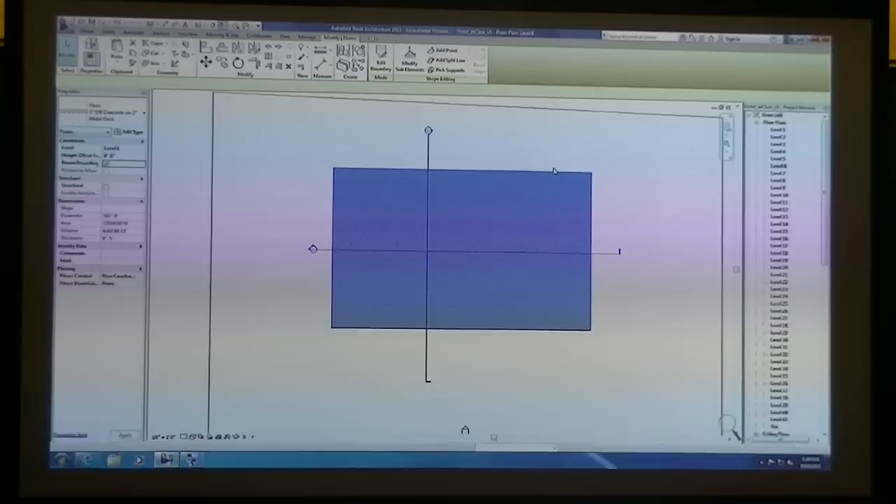You'll see up at the top, there are options like boundary line, slope arrow, and span direction. If I click on span direction and then choose another line, let's say the vertical line, I just changed the way that my floor is running, and I should be able to look at my different section views and see that it switched from section 1 to section 2. It switched directions.

Another thing with floors is, since we're working with that one floor, whichever one you're in, I'm in level 6 at the moment, you might be in a different one. I can also click on this floor. I'm going to go back to edit boundary. And one of the options here is called slope arrow. I can actually click on that and then draw a line.

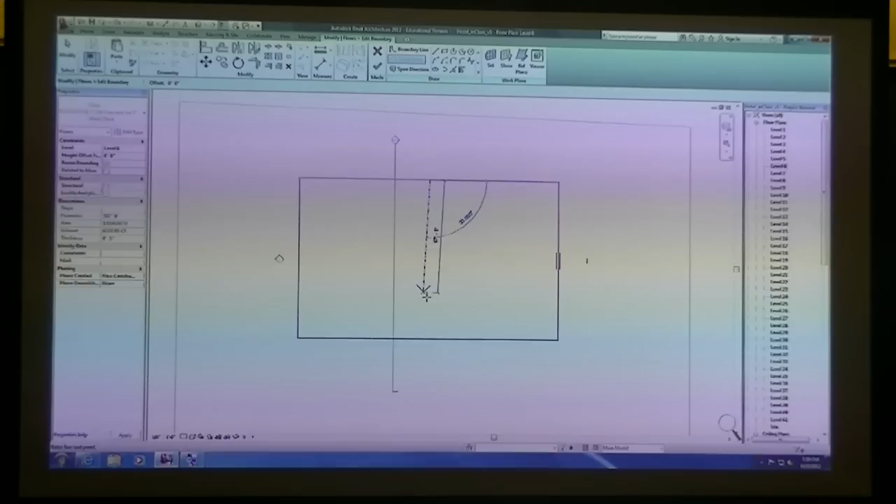You can see when you start drawing the line, you have an arrowhead. I'm going to draw that. We've actually done this once before, but briefly. When you draw that line for the slope arrow, you have what's called a tail and then an arrowhead. If you have your slope arrow selected, it will say under properties on the left, specify height offset at tail and height offset at head.

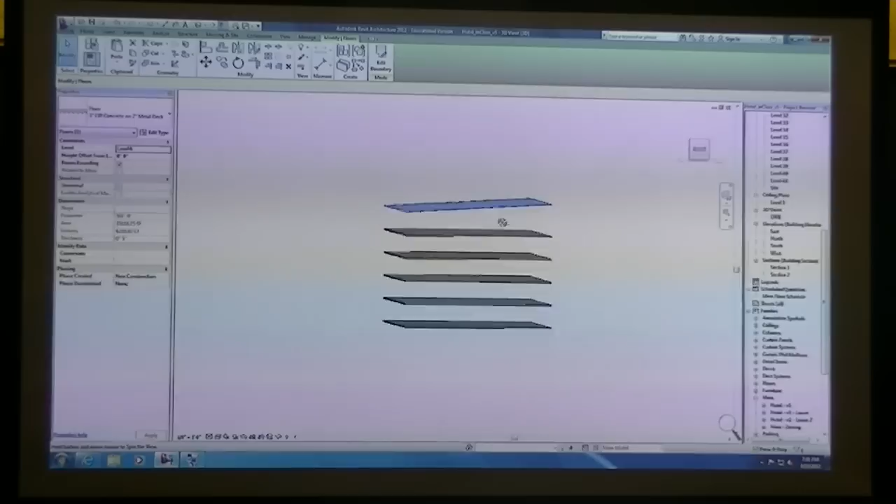So I could come in here and do something drastic like 6 feet at the tail. I'll keep height offset at head at 0. Now exit out of that and then look at this in 3D. And you can see that my floor is sloping now.

Everyone get that? But now here's the thing. So far I've shown you how you can make your own floors, but we've already kind of done a massing study and we have determined the shape of our form. And if we were to continue with this method of creating floor slabs, what we would have to do is actually trace all of our floor plates.

Well, that might be okay to do, but first, it's going to take a long time. Second, if you ever change your mass, you're going to have to go back and edit all of your sketches again because they're not going to be connected, and Revit doesn't know that you want whatever happens with the mass to actually happen with your floor slabs. So I'm going to delete all these because I don't need them anymore. I'll just hit delete. And under massing and site, I'm going to turn on my mass again. And we've already created mass floor slabs.

Now, under home, this time instead of just choosing floor, there's a little down arrow under floor, and you can see there's some other options. There's floor, there's structural floor, and then there's an option called floor by face. You'll notice with the wall tool, roof tool, and floor tool, under floor you have floor by face, under roof there's roof by face, and under wall there's wall by face. Anytime you see by face next to something, that wants you to relate this object to a mass element.

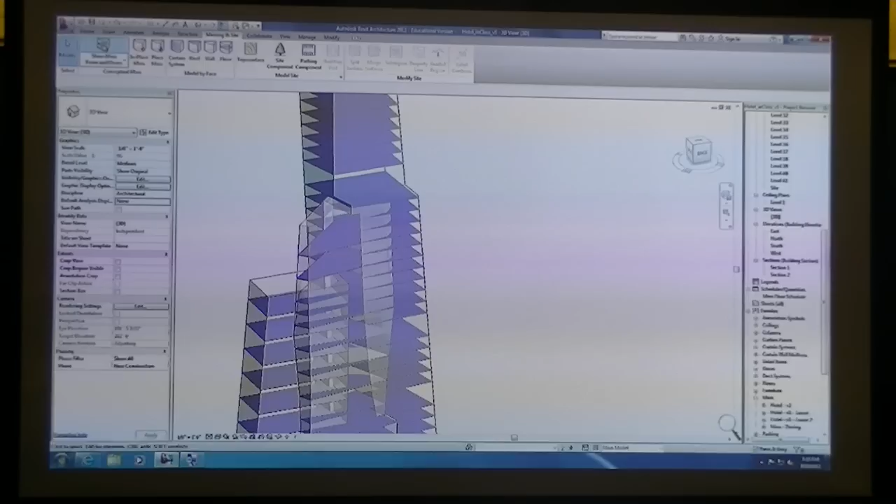So anyway, I selected just a few floors, but what I want to show you is that now these are actual floor elements that we could come back in and click on Edit Boundary, and they are sketchable items, but they're already set to whatever our floor mass happened to be. The significance of that is if I'm back in my mass, and let's say I decide to edit this guy. This is one of those parametric forms that I have. I'm going to twist this around a little bit. Let's do 75.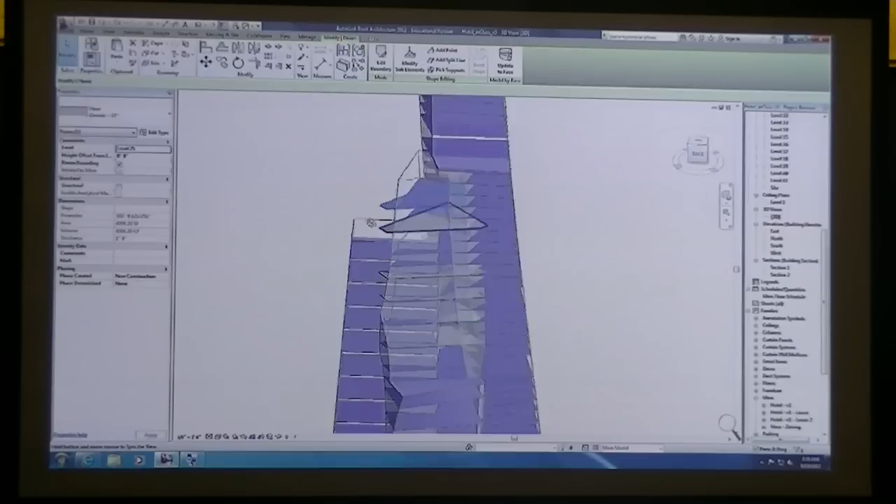So I manipulated my mass, but notice what happened to my floors that I just created. Nothing happened, right? They still stayed. They're kind of poking out of the mass now. Because Revit doesn't want you to make that change until you acknowledge that that's something you want to reapply your actual Revit elements to. So once you've done that, you can select all of these floors again, and then you have this button up here called Update to Face. And if I click on that, they will now update to however the mass floor got twisted or manipulated or changed.

So let's say you created all of them as Revit floors, and then you started cutting voids through the mass, or you don't have to necessarily cut elevator shafts and stair shafts with mass voids. We'll get into other methods for doing that, but let's say you decide you want to shave off a chunk of your building, you can go ahead and start manipulating, or if you have a twisty tower, you can keep playing with the form, knowing that you can always go back and just update the face of your floor. Okay, we got about 10 minutes.

Next thing I want to do is introduce you to the basics of walls and doors so that we can actually start working on floor plans a little bit. I'm going to go into level 1. I'm just going to draw off to the side for right now so I don't have to worry about my form at the moment.

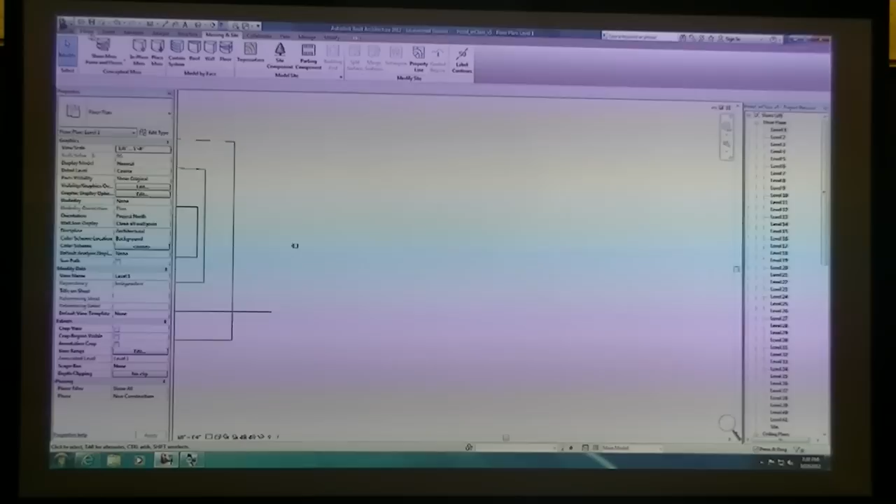So under Home, one of the options here is a wall, of course, and you have different ways of drawing walls. You have your wall, structural wall, and again a wall by face. The wall by face will come in handy when we work with the facade of your building, because that is twisting and turning, or could be, or might not be straight.

In Revit, if you draw by wall or structural wall, basically it's going to just extrude a wall straight up. It's not going to slant it or curve it or do anything that conforms to your shape. So these are more for just your basic walls that you don't really need any kind of structural underlay, kind of a massing underlay to work with.

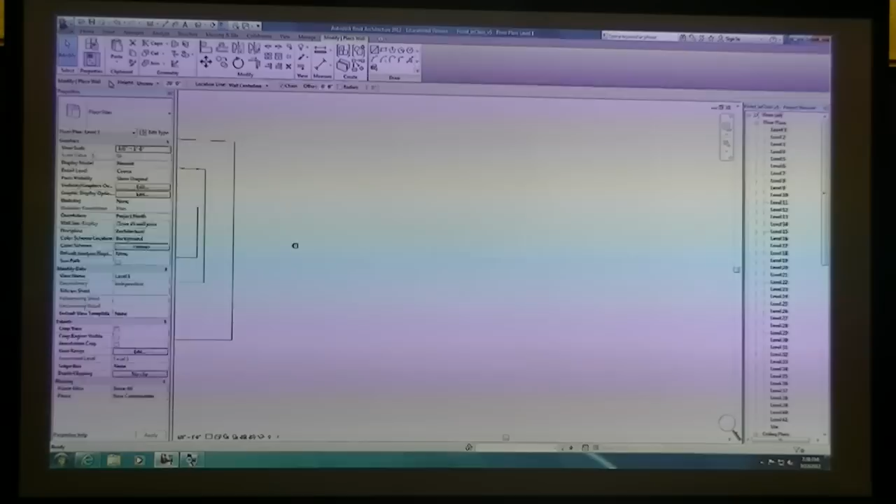If I click on a wall, a lot of people, when they work in Revit or hear about working in Revit, they'll say you have to know a lot about what is in your wall before you can actually draw it. That's not really true. We can just pick a generic 5-inch wall. I'm going to pretend we're drawing the units of our hotel, basically the different rooms. So I'm going to have interior partitions, and I'm just going to start drawing a generic 5-inch wall.

When I select that, I have these draw options. I can pick faces if I wanted to. So if I actually had a crazy form like you see in this pop-up window, you could pick a face of your mass. Or if you just want something to be straight up and down, we have these other lines, rectangles, and different ways of making an arc.

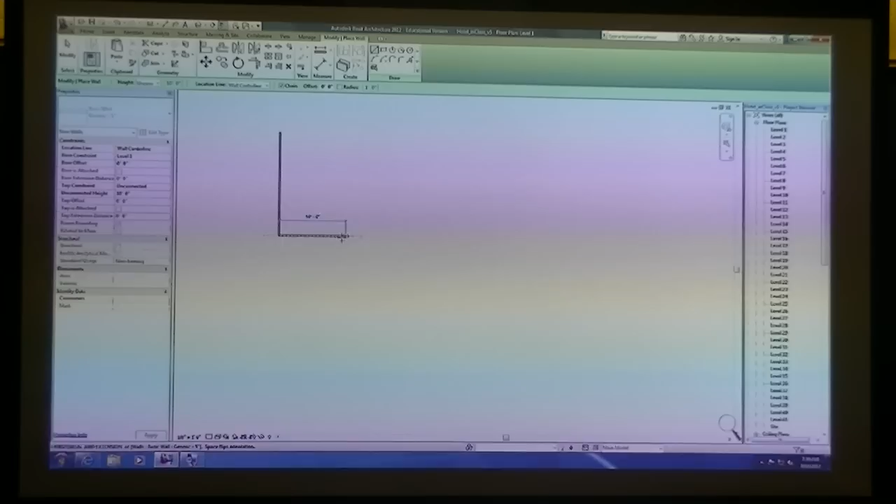I'm just going to start drawing, and you just left click, and as you draw, you have these dimensions that you see. When you zoom in, the dimensions get a lot more detailed. They're moving up in, looks like 1-inch increments. If I zoom out, they might move in 1'6" increments. If I zoom out some more, they move in 4-foot increments.

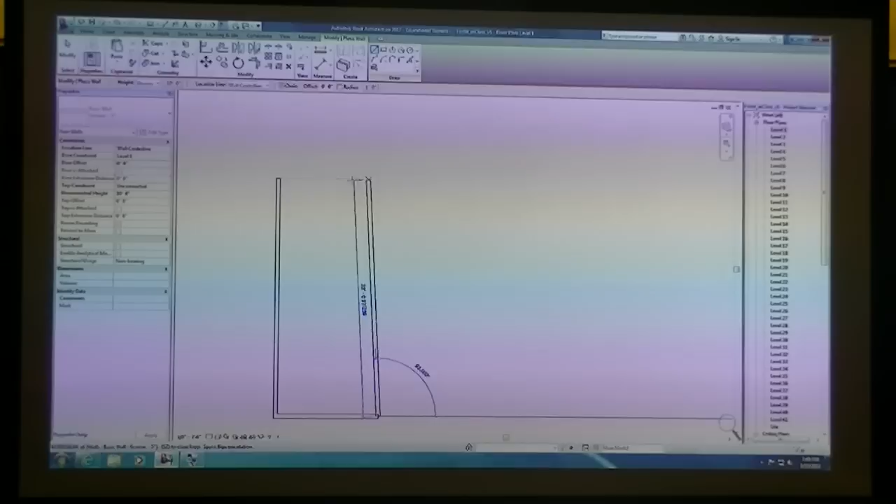But I can also type in, let's say if I know that this wall needs to be 10 feet, I could type in 10 feet, and that will draw that wall. I'm just going to make a rectangle, and you can see as you start to move up to the next wall, Revit assumes that you want to make alignments with certain things, and you'll start to see these dashed lines that occur. That means that you're exactly aligning to that wall that's adjacent, 10 feet away. And I can go ahead and click on that as well.

If I look at this in 3D, you can see I got a box, a rectangle. Now, the height of your walls is controlled by constraints. If I click on a wall, look at the properties to the left. There's a base constraint and a top constraint. The base constraint is level 1, because we're in the level 1 floor plan, it assumed that's where we wanted to draw these walls. The top constraint right now is unconnected, and it has an unconnected height of like 10 feet.

You can draw unconnected if you'd like, or you can actually choose your top constraint, and then it allows you to choose other levels. I could choose level 2, and then this wall now moves up to be 14 foot 8 inches, and the unconnected height is grayed out. It doesn't allow you to edit that number, because in my model I changed all my floors to be 14 foot 8 inches floor to floor.

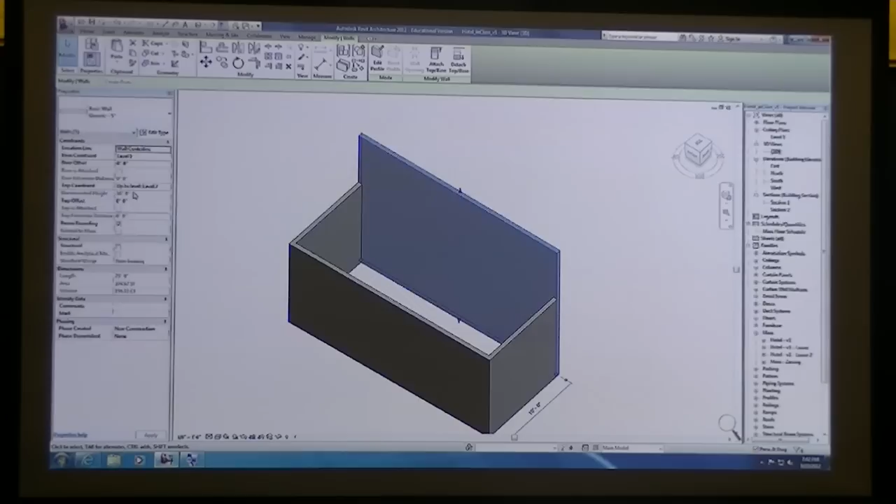Now the reason to set a constraint would be, let's say later on, I decide to go into one of my elevation views. There's my city again, I'm going to VG that. And I go to level 2, and I decide that level 2 really needs to be 16 feet. Because I made that wall have a top constraint to level 2, if I click on it again, it now moved up to follow wherever level 2 ended up. So now that wall is 16 feet.

Last thing, I'm going to go into level 1. I'm not going to get too involved with all the ways of messing around with the walls yet. We'll have another session on that. But just as you draw, you'll notice that you can draw by wall center line. There's a location. You can look at your options bar here. I can also set my constraint, my height, in the options bar.

So I could, as I'm drawing, actually say that I want this wall that I'm drawing to go to level 2. And you can draw by wall center line, core center line, your finished face exterior, interior, and all this kind of stuff. And I'll get into what all that means. But basically, if you do a finished face exterior and I start drawing, you can see how the wall is being drawn with the dashed line on one of the faces. If I hit the space bar, it flips. So as I'm drawing, I could decide if I'm drawing on the right side.

Next thing, if you downloaded that door from the family part of the website, so I told you to download your single family door. The doors in Revit that come with it, I don't really approve of. They don't have the hollow metal door frame. They don't have other options like how to control the door swing. They're just really basic doors. And then they also name the doors in inches. Nobody talks about doors as a 36 by 84 inch door. It's always a 3 foot by 7 foot door or a 3 foot by 6 foot 8. So it's kind of annoying how this is set up.

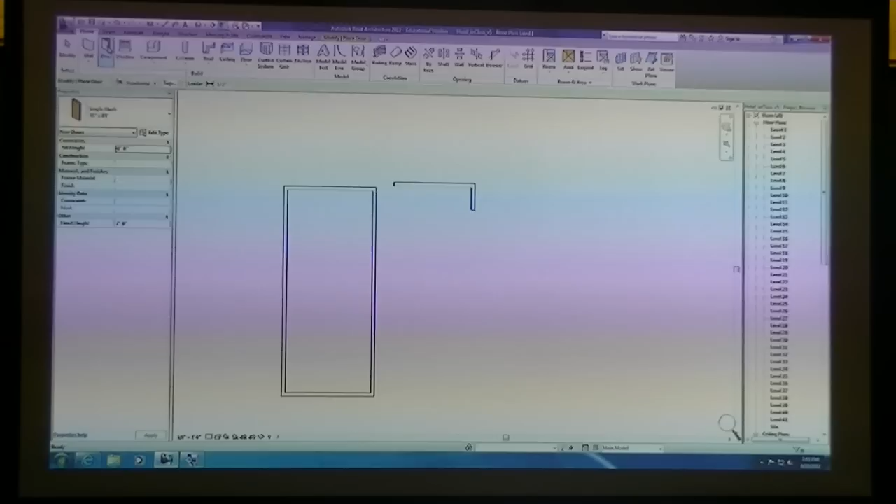What I would like to do is actually load in a door that I approve of. And what I can do is under Home, if I click on Door, and this happens with every family, if you're doing a component, a window, or even any kind of structural column, there's a button up here to the top right that says Load Family. I can click on that, and by default, it's going to go back into our family categories in the Imperial Library. Remember, we were working before in curtain panel by pattern. We were also working with generic models, our masses.

I want to go ahead and find that family that I just downloaded. So wherever you downloaded it, go ahead and scroll to and select the door single flush family and hit Open. What that will do is it'll load that door into Revit. You'll also see that you have Tag on Placement highlighted. You can keep that highlighted for now. I'll tell you what that is in a minute. But you'll see that as I hover around and I don't see a wall anywhere, I get the Ghostbuster sign that says no. But as soon as I move in and hover over a wall, I can actually place the door.

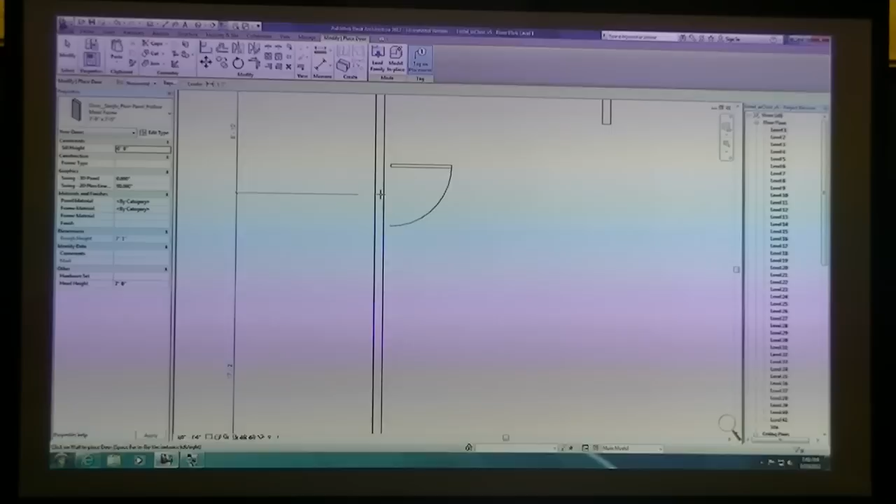And you look and you say, well, that doesn't look really nice because you don't see that hollow metal frame that I just told you about. But again, that's because we're in the coarse view. If I turn it to fine, I can get my jambs, and it automatically cut a hole through the wall and trimmed all that out for you so you don't have to do all that mess that you do in AutoCAD. And if I select that door, I have a couple of properties already programmed into this that allow me to change the swing of the door. So I could change this to a 45 swing.

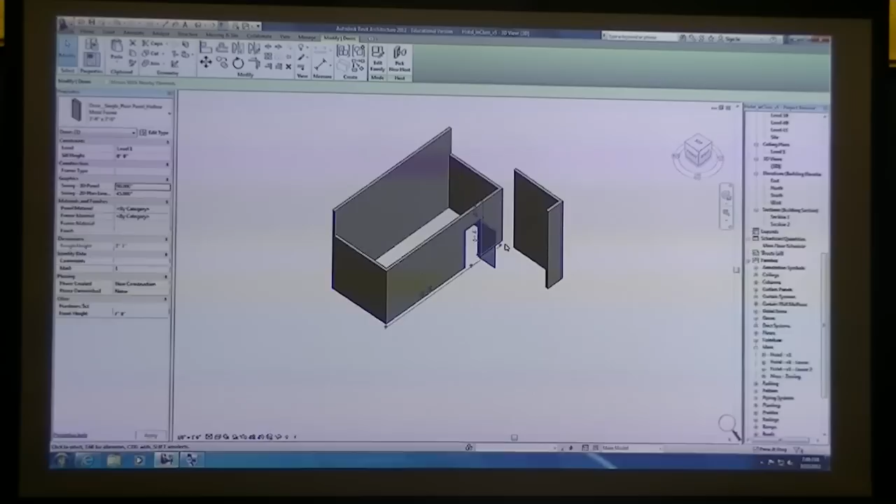I could also go into my 3D view and look at this door. Right now everything's just kind of gray at the moment. But I could also pick this door and choose a swing in the 3D view and have it swing open so that if I was modeling or wanting to kind of actually view into this room, I have that ability. A couple quick things with the door. I'm back in level 1.

When you click on that door, you notice these little flip arrows. I can flip it by clicking on those arrows. I can also hit the space bar. I'll cycle through. I can do the same thing while I'm placing a door. I can click on door, and as I place it, I can hit the space bar, and it will change how I'm flipping the door around.

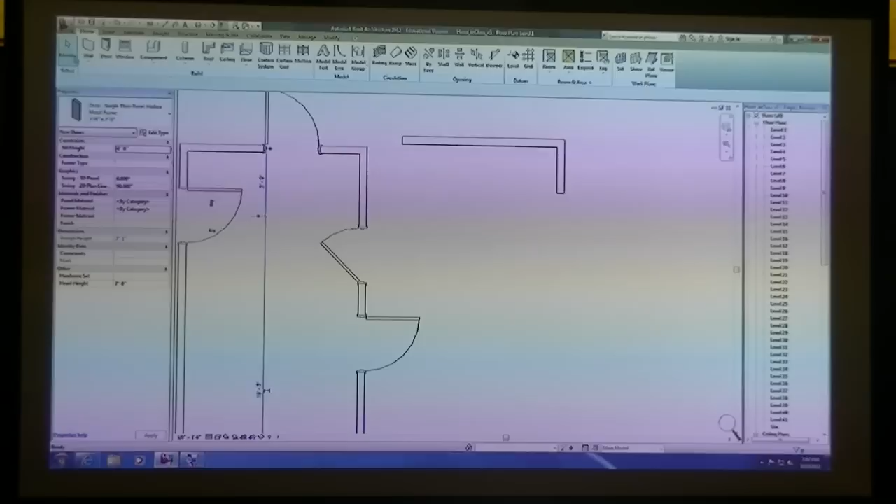Now these little pills that pop up that have a little number in them, those are called door tags. And I'm going to delete those for right now, but the reason those actually get placed is as you hit the door command, we had Tag on Placement selected. So if you unselect that, then from now on when you place a door, and you start having a floor plan as well as you're starting to build the model.

So real quick, today we went over just how to start creating real Revit elements that are associated with your mass. So you can still play with the design of your mass and you can start putting in real floor plates. And the reason you put in real floor plates, actually putting those floors to the mass, is so that you could turn off your mass and be in a floor plan and kind of see the boundaries of where you can build to and what you can manipulate in your floor plan.

And then I just started showing you the basics of walls and how to place doors, kind of the essence of starting to create a floor plan. What I want you guys to do for Tuesday is, well, first of all, you guys need to transfer your drawings from the second floor down to the first floor. Remember, we got to do that by tomorrow, hopefully.

You can either do it tonight or first thing tomorrow morning, but it definitely needs to be all up by Monday. Monday is the open house, and there's a little schedule right when you walk in. You guys probably have seen it. But we definitely need all of our drawings down there, and you guys need to display your work because you're going to kind of be the front door to the college, which is great.

The other part is I want you to continue massing. Get a form that you think you like and get it close to the 287,000 square feet or whatever you think your total should be. Remember, I did a 191,000 square foot and then we multiplied it by 1.3 or 1.5. I chose 1.5 just to maximize it.

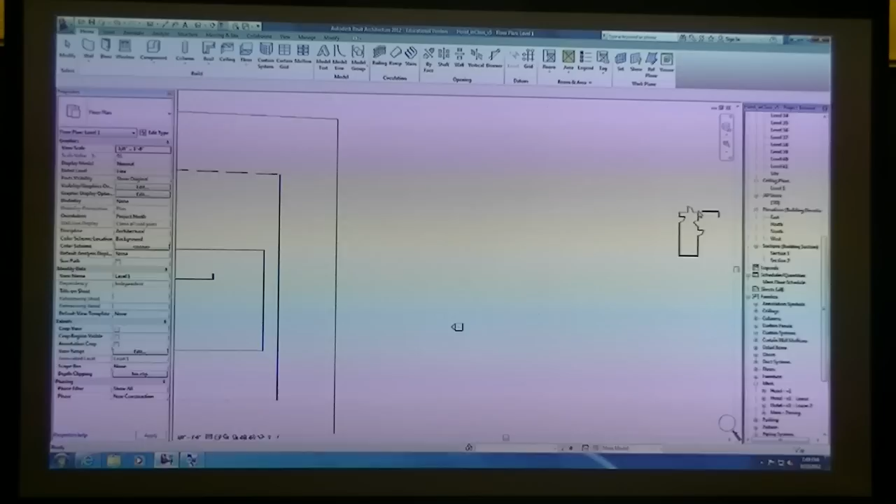Play with your form, apply real floors to it. You might just apply, most likely, the 3-inch lightweight concrete with the 2-inch metal deck, because that's more realistic to what you would normally have. It doesn't matter which one you apply because you can always change it later. The third item, is that 3 or is this the fourth item?

Third item is I want you to, somewhere off to the side, and it could even be in another file, start drawing a floor plan of just one room, of what you think one hotel room should look like. And basically all you're doing is building the walls and placing the doors. It should be fairly simple, well, it could be complex, but you're just going to have a couple different rooms. Most likely you'd have a living room area, a bedroom area, and then also your bathroom and shower area.

Don't worry about placing anything other than doors, and just have something mocked up. Start to think about how your rooms will actually be laid out. Because if you think about it, we're going to have a lot of rooms, and they will most likely be copied over and over again. That's kind of the beauty of a hotel. And then we can get into how to make that happen.

Look at the program. The program had in it, let's see, under rooms, there's a net area for a typical guest room. There's also a net area for 2-bedroom timeshare units, so more like a suite type of deal. And then there's also areas for balconies. You can kind of plan in how you might put in a balcony, but just think about it a little bit.

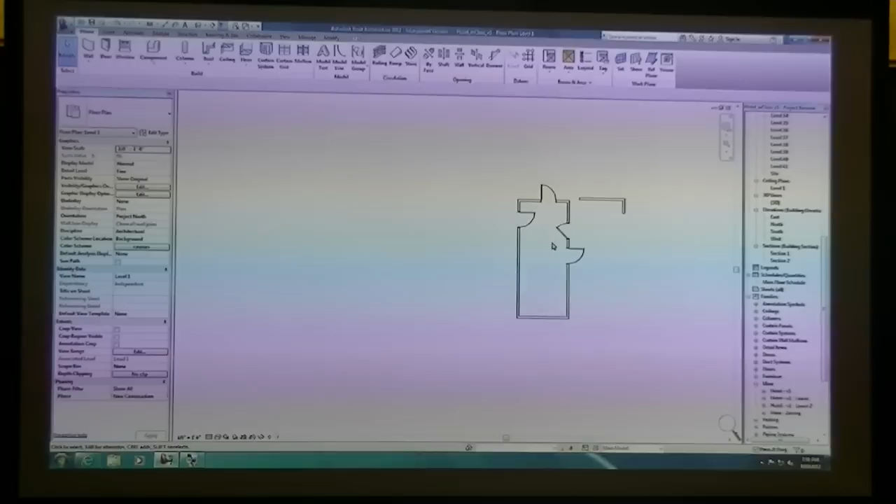You could also just sketch by hand and figure out what you want it to be, and then start drawing it in Revit. Make sense? So the key is to get that mass worked out. In our drawings, can we just put the properties and say we need level 2 or 1? What do you mean? I would say it'd be nice if we could do that. For the rooms? Yeah, you could just